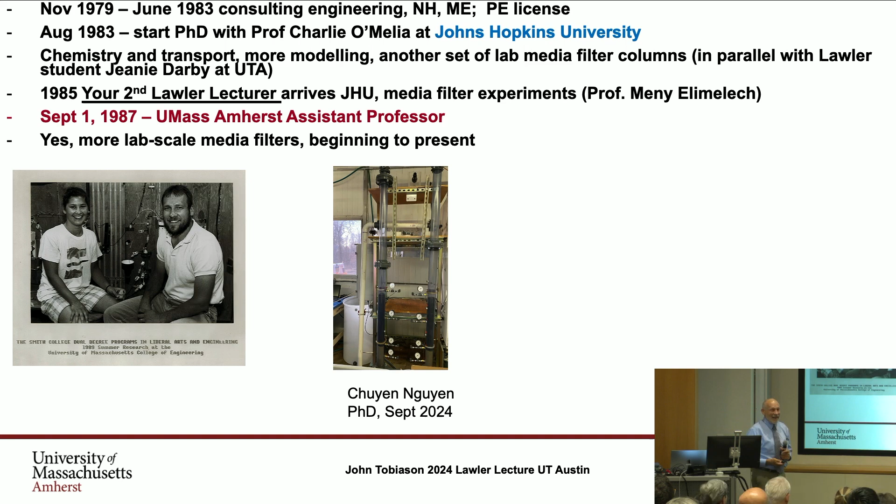I'm here to talk about these subjects. So why? Well, good fortune. I went to UMass Amherst, and Jim Edzwald and Dave Reckhow, who actually know something about DBPs, were there, and I learned a lot from them. And of course, I had a basis in it from going to UNC with Phil Singer and stuff. Then during my first year, Bill Knocke from Virginia Tech was on sabbatical, and we started doing manganese and haven't stopped together. So those things happened.

Really, the subjects are pervasive, complicated water quality challenges for utilities. That's really the reason they're here - fun, complicated, but super relevant to day-to-day operation of every drinking water treatment plant that meets regulations in this country every day. So we have to pay attention to them.

So the question - this comes out of Dave and I having a chance to present a lecture and talk about our lot of work with utilities and agencies. So why do that work? Why work not for NSF or NIH or something like that?

I think there's questions to be answered by PWSs, public water systems, that pertain usually to the regulations, but sometimes not. They don't have the staff time or the ability or the facilities to undertake the work, and they value their role in workforce development of students. That's critical to the teaming. The university values that student experiential learning - now we call it experiential learning experiences - and the scholarly output.

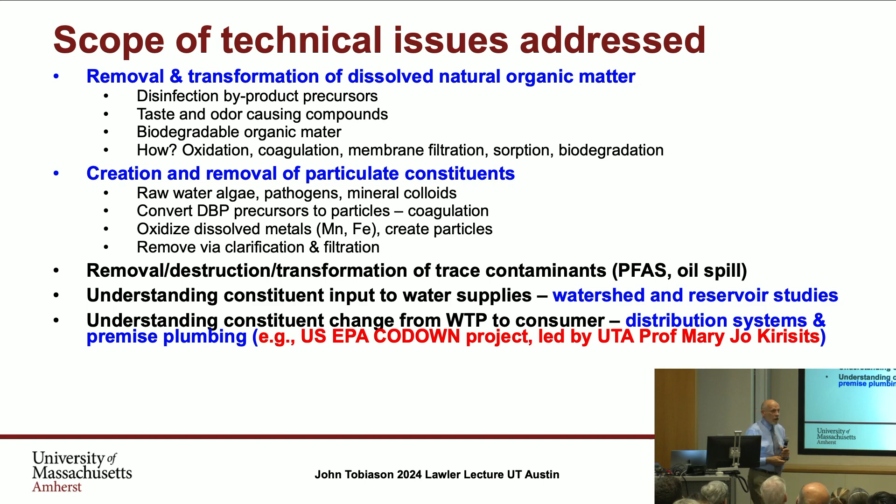Most recently and currently, Dr. Kirisits runs a project, EPA funded, that we work on related to disinfection byproducts and pathogens in drinking water systems. The UMass folks are focusing on DBPs. A couple of weeks ago, I was at one of our utilities and shipped some samples here to the lab for analysis by this project, for example.

How does this work? Well, you've got to have people in the utility or at an agency who understand the need to learn from the research, who ask good questions, and who value workforce education. You've got to have faculty who appreciate that interaction and see where this stakeholder-based work benefits their career interests, if it's good in their students' best interests. You need some patience and time to interact. You need flexibility—sometimes the utility needs something that wasn't your fundamental thing done, and you need to be responsive to that. And you need collaboration between everybody.

So all the things that are the hallmark of good community-based work in general—I think you have all these things here at your EWRE program at Texas, it's amazing, it's been great. By the way, our program is also called EWRE in our department, by that name, we've had all that together.

All right, so that's some background, interesting. I've got to get technical for the rest of this.

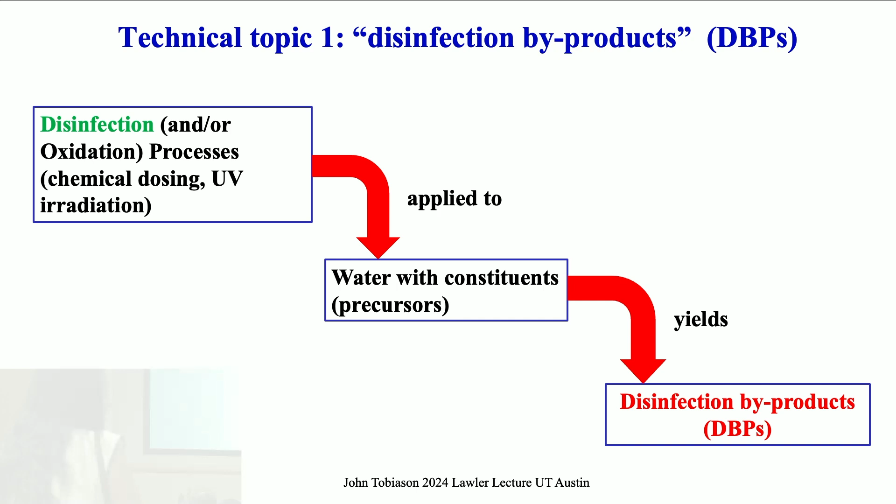So the first one is about disinfection byproducts, and although it's an extremely technical audience, which is great based on raising hands—unless you happen to be the HR person from the local firm, but probably not, you're here. So, we do disinfection. What I mean by that is applying things to water. The water's got constituents in it in addition to water, and it yields some things that we call disinfection byproducts—the byproducts of the disinfection process.

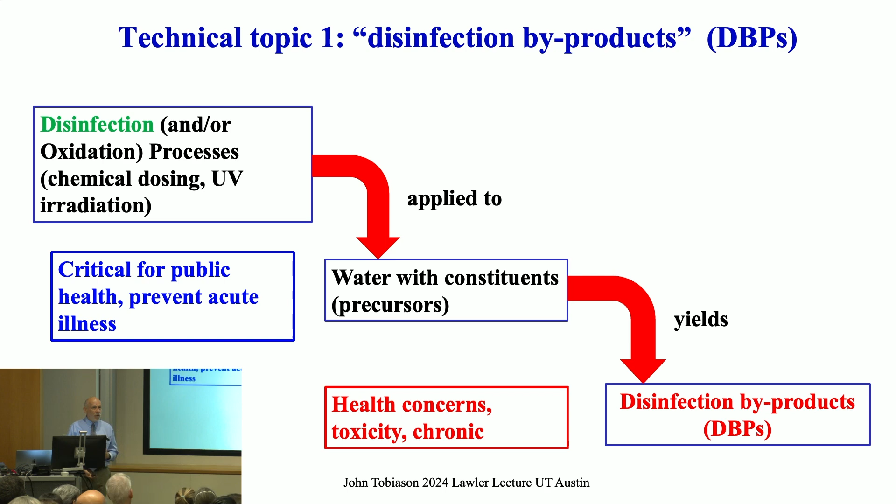It's really important—the disinfection part is a critical step in our barrier to protect public health. It's a treatment technique we use to protect people from maybe the occurrence of pathogens, maybe not, but we have it in place. On the other hand, the disinfection byproducts, unfortunately, have health concerns that are more at the toxicity and chronic level as opposed to acute. So we have this challenge of something we have to do, but something that creates problems we're worried about.

Just some definitions, and I apologize—some of these slides are very much teaching slides, so they're a little deeper than they need to be. Primary disinfection: we apply a certain level of disinfection that's regulated, that every utility in the United States has to report meeting every day. It's a necessity of providing water. We might do it at the beginning, middle, or end of treatment processes, and the disinfectants we're allowed to use by regulation to meet this goal are: free chlorine, chlorine dioxide, ozone, UV light. Chloramines are allowed, but very rarely do we have the time required to provide primary disinfection by chloramines—the occasional 10-mile pipeline between A and B, yeah, but in most cases we can't do that.

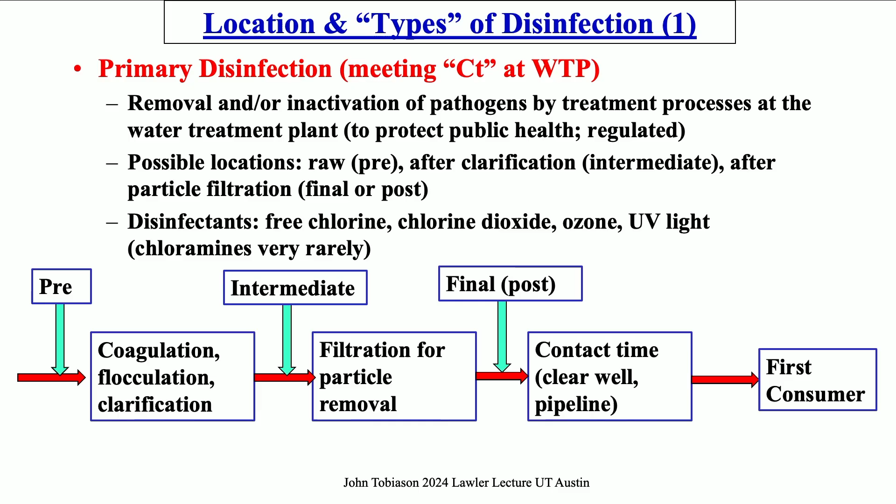Okay, secondary disinfection is the provision of a residual in the distribution system to continue to protect water quality—maybe provide some biostability, protect against recontamination, and serve as an indicator of water quality. Some aspects of this are tied to this CODOWN project, whether this is here or not.

Not everybody in the world believes in this or requires this practice, but in the United States, we do. This usually, though, is only for free or combined chlorine, or chloramines, not an occasional short-term chlorine dioxide.

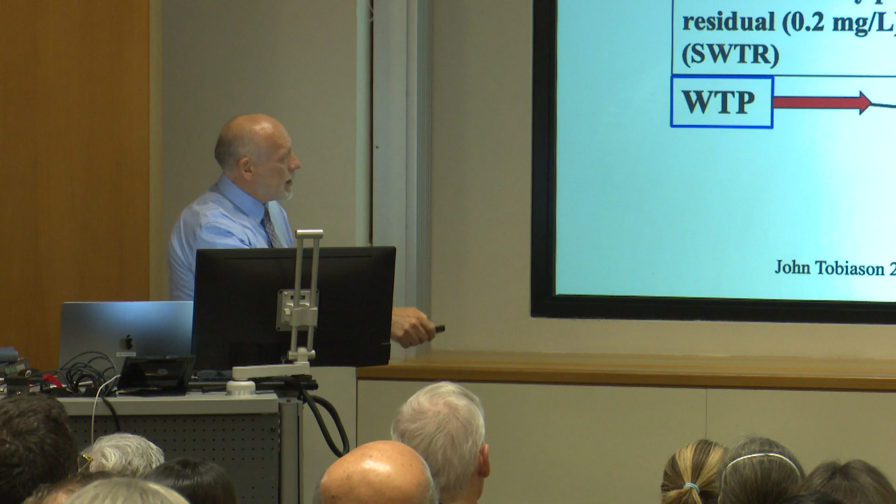So we have this paradigm here where we start with a requirement. This may change because I know Mary Jo's involved with the committee and the government. We are revisiting our disinfection rules and surface water treatment rule, and we may change that to not just detecting or sniffing it, but actually measuring a number there. For example, that's one of the things that might happen.

And we've got homes and buildings and storage tanks involved. So what's regulated? There's a bunch of organics regulated, the trihalomethanes and the haloacetic acids. The bold part there, we have a number.

The LRAA is a locational running annual average. We have to take samples from a distribution system, take the average over the course of a year, and be below this value.

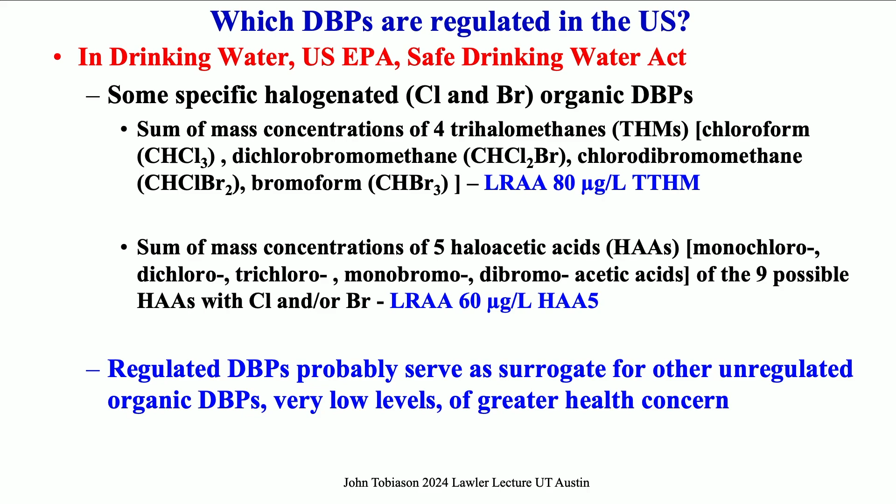I want to point out that if you actually look at the compounds being regulated and their associated toxicity and health risks, and our knowledge of some increased types of health problems, maybe bladder cancer related to drinking chlorinated water, these are not the compounds causing that. These are not the things.

So they're really a surrogate. They're really abundant compounds that we can measure and offer control of. And the notion is that if we control these compounds well, we'll also control other things that we don't know as of yet are the cause of those concerns.

So it's important to point out, particularly brominated compounds. We mentioned brominated compounds today, Pavel and I think. So some inorganics are bromate and chlorite. You'll see where that comes in a minute.

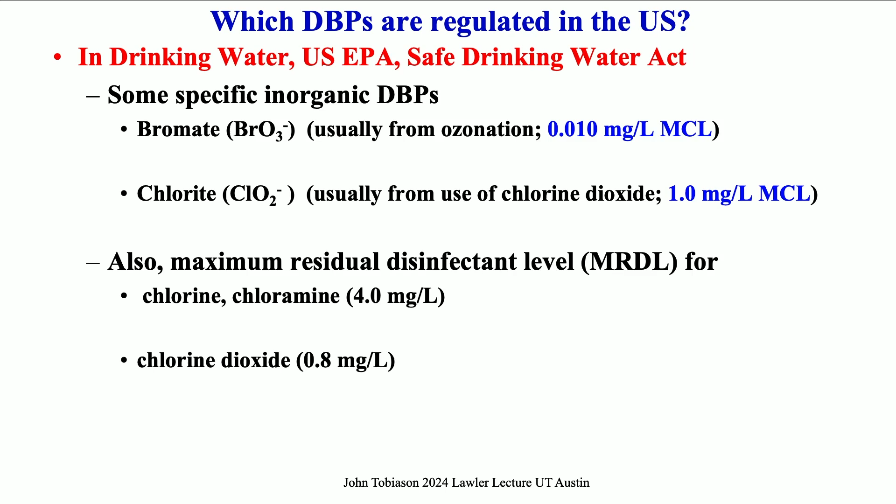Also, we don't like to call the things we do to protect public health contaminants, so we came up with another word called maximum residual disinfectant level, otherwise known as a maximum contaminant level for the things we apply to help us out, right? So it's a two-edged sword. Good, bad. We got both things going on.

All right, so how do we control DBPs? Really, these are the three main messages, and then I got a lot of flavors of how we do it. We can control our choice of the processes we use to achieve the objective and perhaps minimize the occurrence. We'll talk about that.

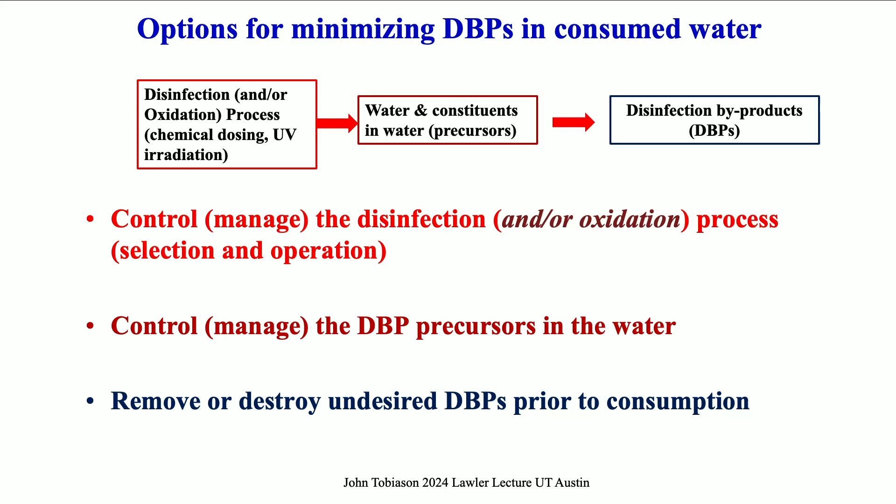We can control or manage the precursors, the things that the disinfectants react with in the water. And lastly, remove or destroy the undesired DBPs. The least good way to do this would be better to not make them in the first place. So, some color coding here.

Green, if you're not colorblind, this is going to be good. Green is good. Brown means that this aspect also ties to manganese. So the brown is that thing I'm saying there ties to manganese. The green is that it's good.

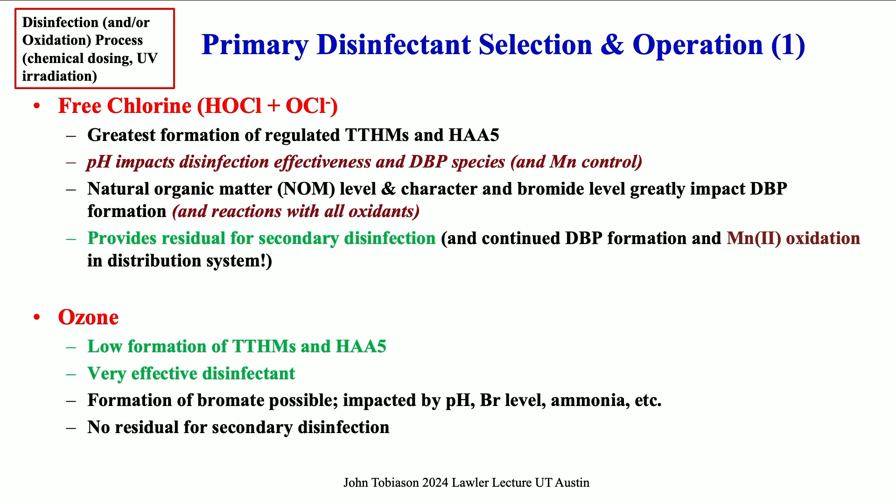So free chlorine is great. It makes, unfortunately, regulated trihalomethanes and haloacetic acids. The pH is a big player in disinfection. It also is a player in the control of manganese.

Natural organic matter, the nature of it, the amount of it, is a big player, and it reacts with all the oxidants. Oxidants are also reacting with manganese, so it's another thing that interacts. And it provides a residual for secondary disinfection. Green is good that we have that residual because we have to have one.

Unfortunately, while it's providing that residual, there's continued opportunity to make DBPs as that residual exists and we go along in the distribution system, and by the way, to oxidize manganese when we don't want it to be oxidized. So these things go hand in hand.

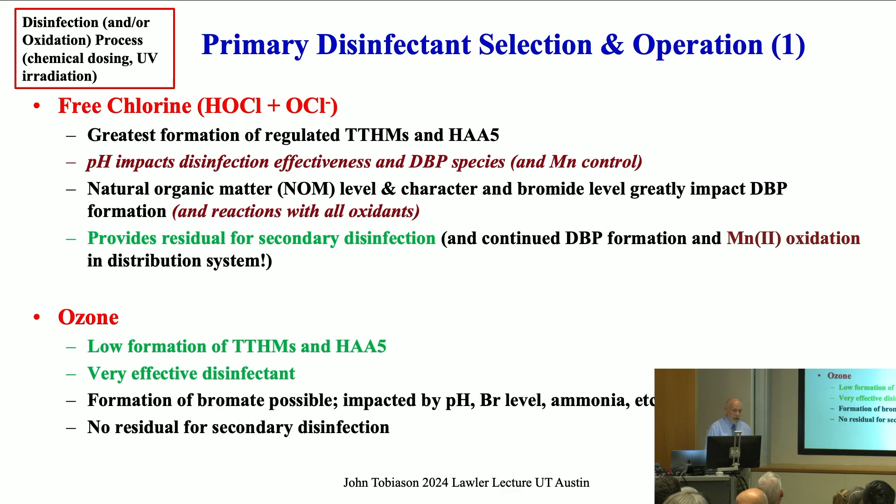Ozone, you may have heard more about this from your first Lawler lecture, Dave. This is one of his favorite topics, ozone, but it doesn't make much THMs or HAAs. It's a very effective disinfectant. But it does make bromate, and there's no residual for secondary disinfection.

So what about the secondary disinfectants? You're going to use free chlorine, you're going to keep making DBPs. So I mentioned that slow oxidation - it's good to limit the time to decrease formation.

Chloramines - Jerry's favorite subject, one of his anyway - is also good, and we do it a lot to meet regulations in this country. A lot, like 40%, 35%, some number of treated drinking water in the country. It doesn't make THMs and HAAs, but it might form some unregulated compounds of concern. It could be nitrified and be destroyed in the distribution system. But maybe it's better to control biofilms, which may impact opportunistic pathogens, than free chlorine. So a bunch of things going on there.

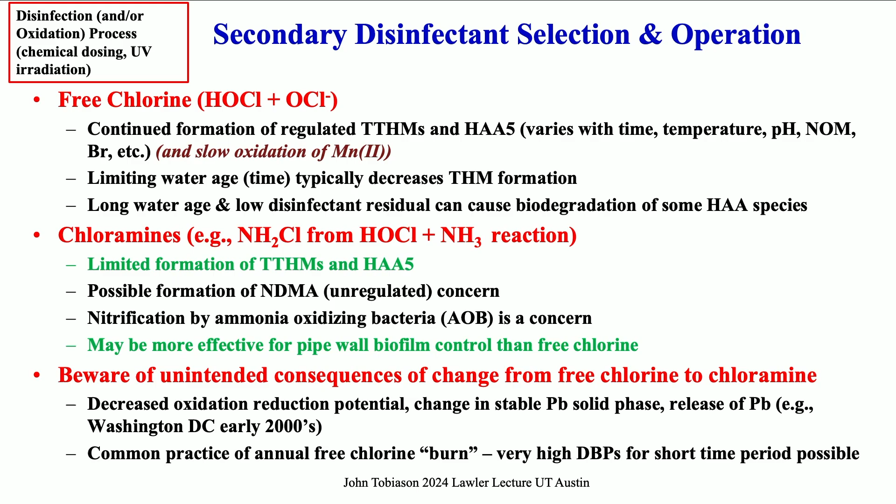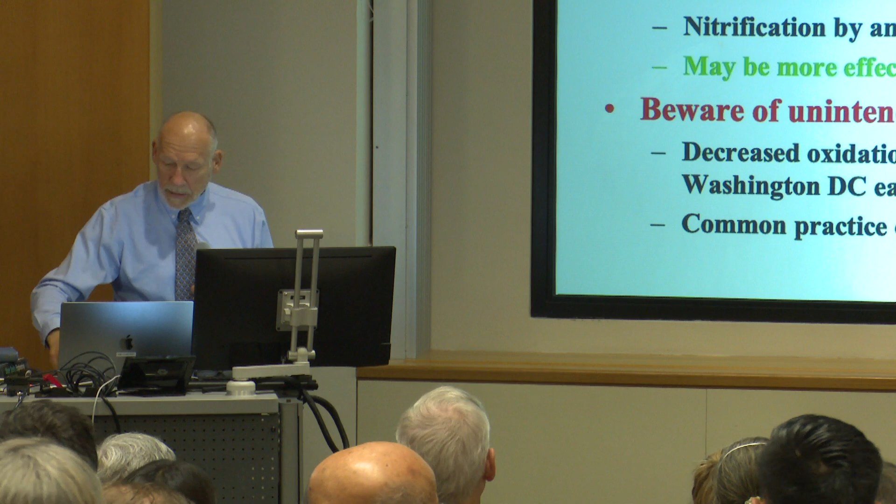A little caveat here in the drinking water world - I think most folks are aware of this - you've got to beware when making a conversion from free chlorine to chloramines, because you might have unintended consequences with lead, like in Washington, D.C., for example. Also a lot of places end up with what's called a free chlorine burn, which is great operationally, but no one talks about the water quality produced during that burn because nobody wants to know. Nobody samples for regulations during that burn. It is not a place you want to be. So it's not a great thing - unintended consequences.

All right, so a little bit on the science. This is a Dave Reckhow slide that I love. So the precursors: free chlorine, NOM, and bromide. I'm not going to say much about this, but it just turns out that bromide reacts super fast with free chlorine, makes hypobromous acid, and hypobromous acid reacts really fast with NOM compared to free chlorine. So you don't really like that to happen.

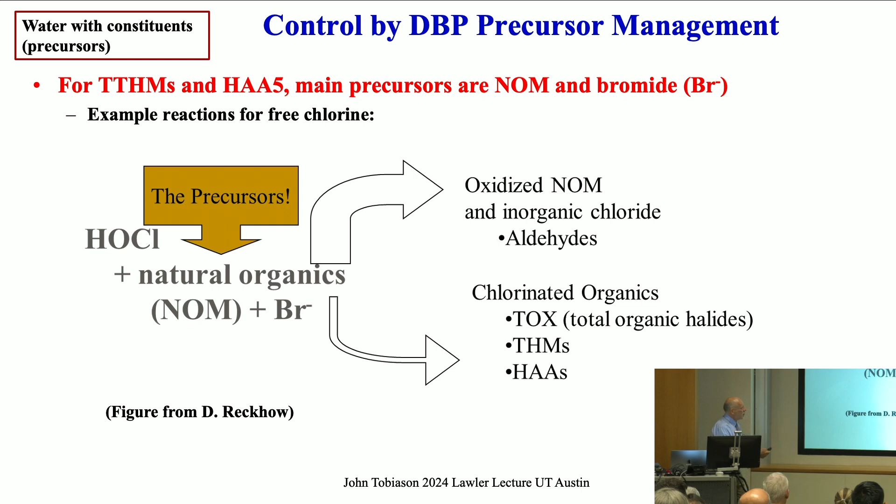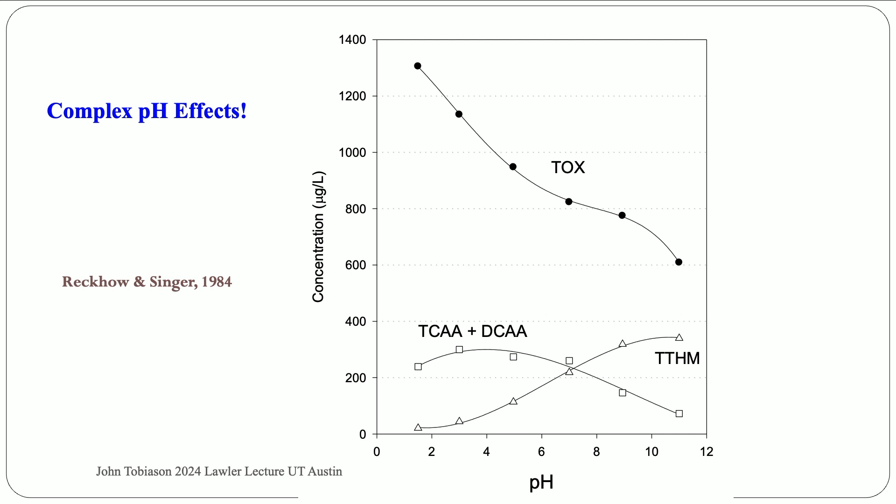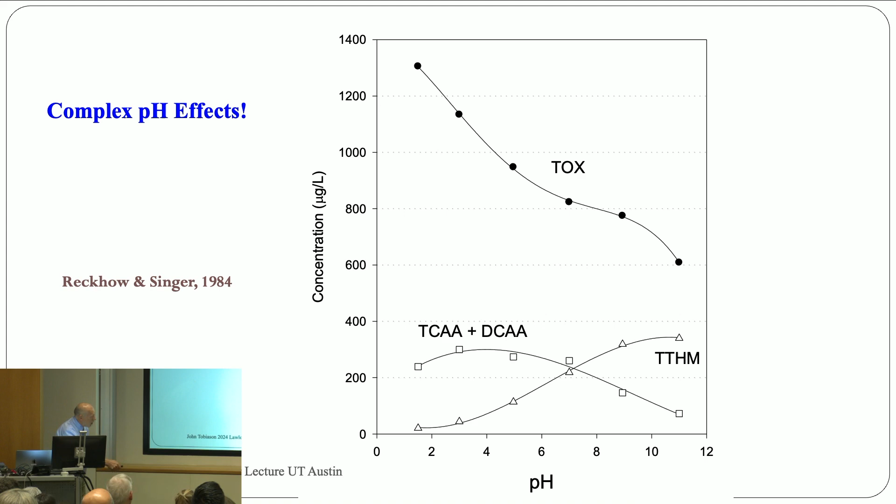This is a slide from Dave's PhD with Phil that I just want to point out. pH - here's pH, two regulated things, HAAs and THMs. Should the pH go up or down? Depends, right? That makes more THMs and less haloacetic acids. So it's not a simple answer - it's complicated, mixed with those two things that happen in here. We get multiple effects. Notice in the lab you study things down to pH 2 and up to pH 12, but notice in drinking water treatment we only deliver things between here and here - that's all, we stick in there. But in the lab you need to understand those things.

Okay, so the management of precursors - the biggest thing we learned at first was don't chlorinate raw water, don't add chlorine at the maximum precursor level. So that changed a lot. Maximize the removal - most commonly it's for NOM, not bromide. But the problem is if you do that, you increase the ratio of bromide to NOM when it does occur.

And you can make more brominated DBPs, which are probably the more toxic DBPs. By the way, it's a mass-based health standard, and bromide is a lot heavier than chloride. So it turns out for the same number of moles of stuff, you get a lot more mass of stuff, and you violate the regulation just because they were brominated, not chlorinated.

So a couple of classic cases happened. The other thing I'd probably spend more time on in studies with utilities is practicing optimal coagulation to maximize NOM removal. But sometimes the optimal pH for coagulation can be at odds with good manganese oxidation. So that's a problem we have to face.

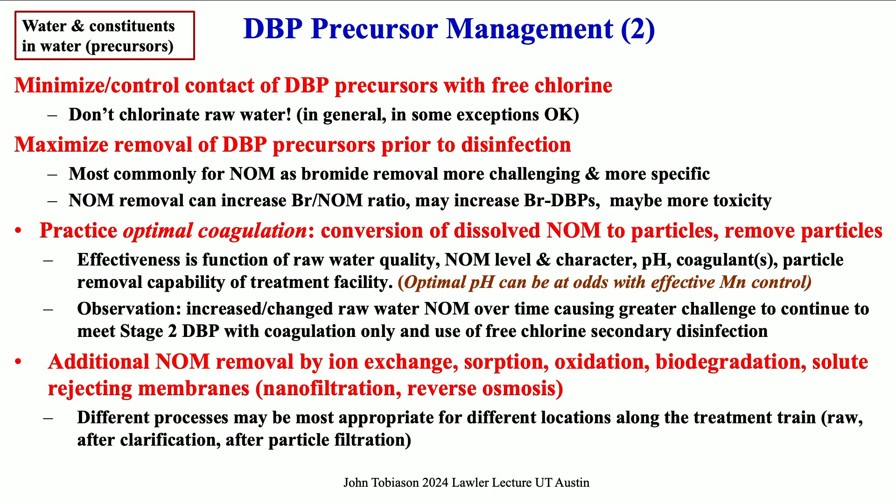And then we study all kinds of ways to do additional NOM removal, and I'll only mention a couple of those things. We have this fortunate situation where things we measure in the water about organic carbon also correlate with trihalomethane formation potential when we chlorinate it.

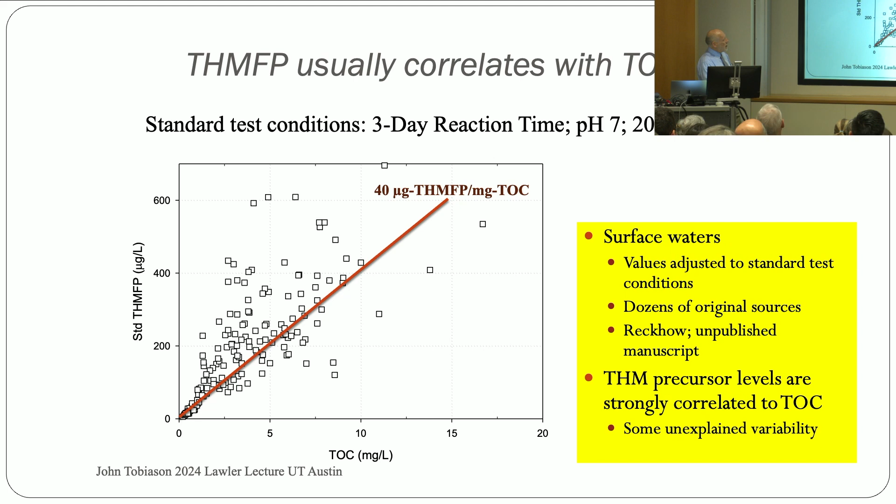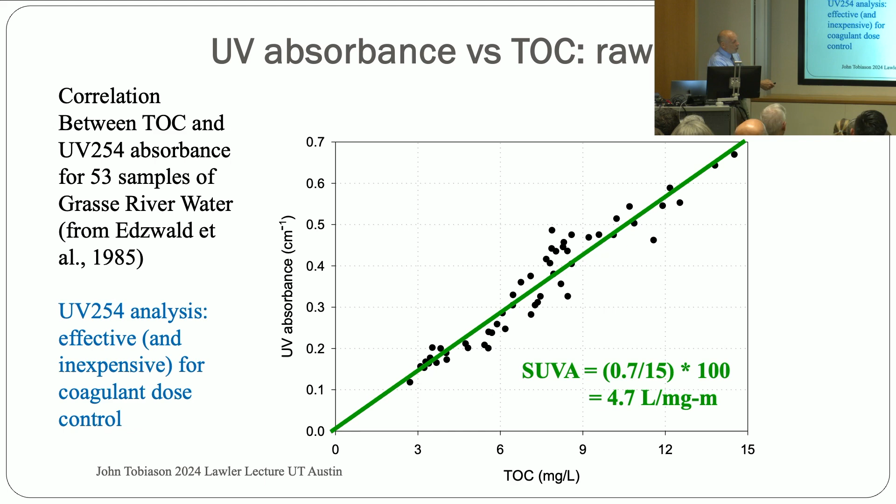This is one particular set of data for TOC. And it turns out something that's really easy to measure in the lab, UV absorbance, super cheap, super fast, also correlates with TOC, and it's great for controlling coagulant dose. So the slope of this is specific UV absorbance. I don't have time to talk about that, but it's the character of the organic matter.

UV and THMs correlate, so we can use a simple measure of UV and get a good idea of how treatment performance works. We'll do that a lot. Classic jar test: UV as a function of dosing of some coagulant, optimized to get a very low level of UV. This is the classic way to control NOM and get good performance.

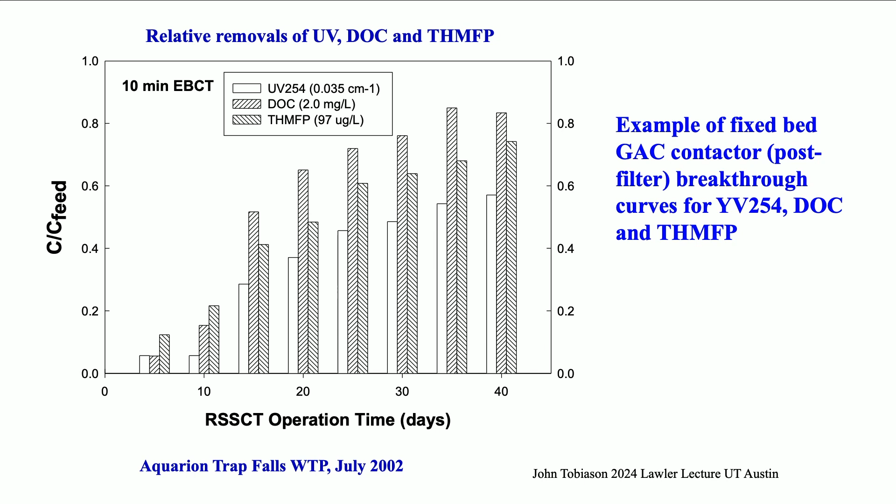This is a breakthrough curve for a carbon contactor. Imagine you're going to use a carbon contactor, GAC, to remove organic matter. This is DOC, UV, and THMs, and you see it correlate.

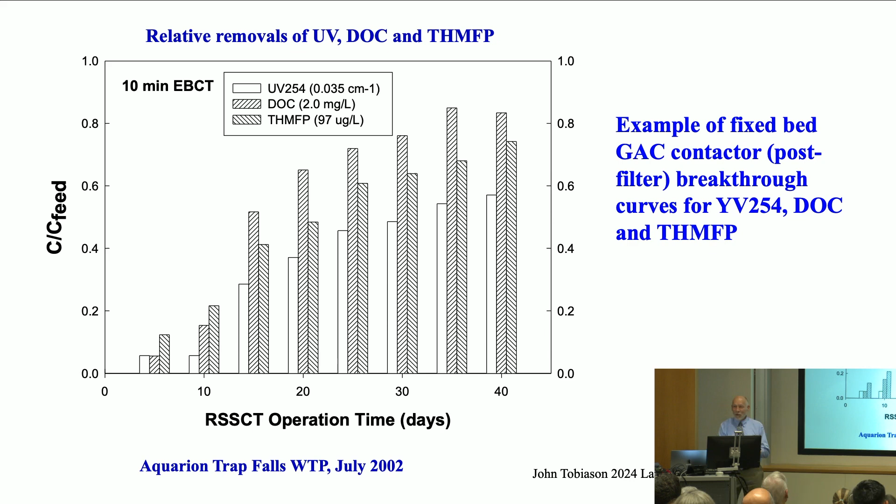So Dan may have done the membrane studies that were parallel to this, but I don't remember. Or both. I know he made the membrane system work. I remember - oh man, I'm sorry. Well, I know he made it work.

Okay, so the other couple of choices are: let's destroy the DBP precursors, just make them not make DBPs. So we can add oxidants to do that. And the cool thing about doing that is we also do that for manganese control strategy, so maybe we can get both out of that.

We might find an additional decrease, but sometimes we can get it all by coagulation anyway - sometimes. And then, something some of you in here have worked on as well, we might be able to remove more DOC if we allow part of the process to be biologically active and biodegrade the DOC. So it's another removal mechanism to get rid of precursors.

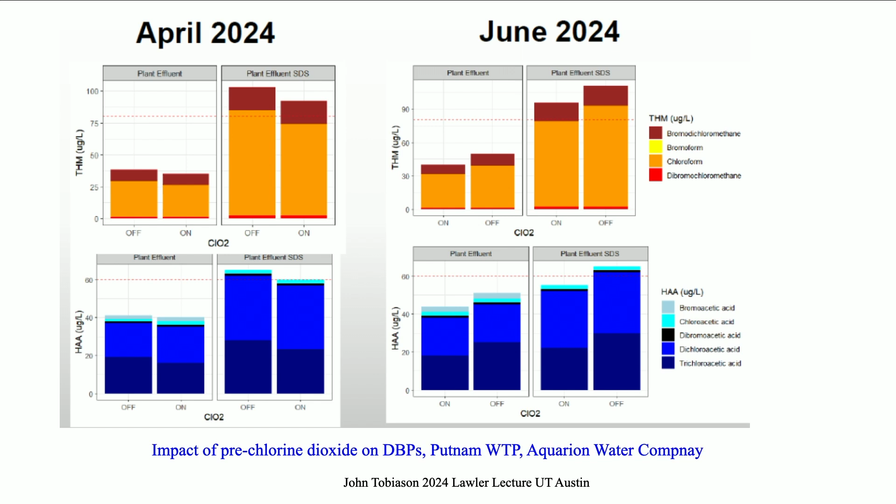Just because it's recent, from that same PhD student I mentioned who was doing filtration - this was full-scale work. This is chlorine dioxide on and off at a plant called the Putnam Water Treatment Plant. It was off, and then every summer they turn it on. A little bit later we turned it off for a couple of days just to see the impact. So we went off to on, and on to off.

And in all these DBPs, basically a 5 to 15% decrease in DBPs resulted with the pre-chlorine dioxide on. So a win for that. She wasn't studying that - she was studying its impact on filter performance, which I'm not talking about today. But anyway, that's another topic.

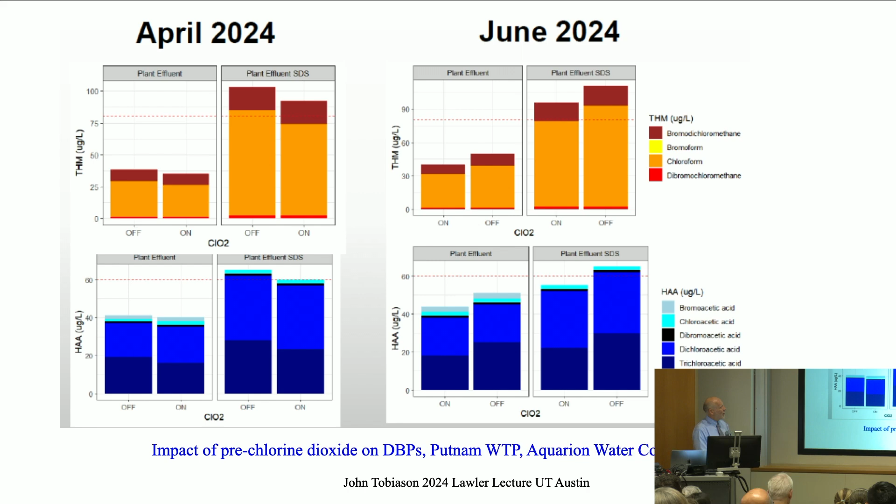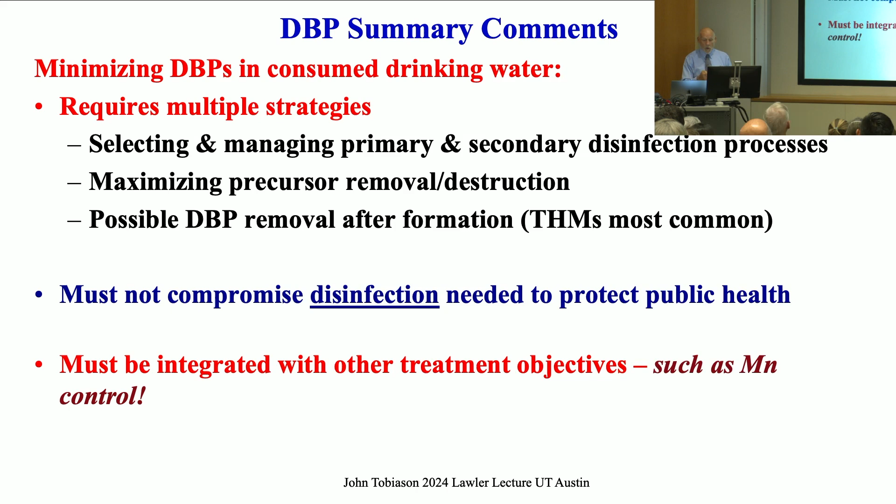So the second technical topic is manganese. I have some preaching points at the beginning: one is, in the water profession, you talk to somebody and they say 'yeah, we do iron and manganese control, we treat for iron and manganese.' It turns out there are two things - one is iron, one is manganese. They're very different. Sometimes they occur together, sometimes they don't, but it's not one word, so you've got to pay attention to it. It's a very common need.

Complexities are often ignored, myths perpetuated, and mistakes made. I'll talk about lack of characterization of forms, and with our super accelerating attention to PFAS, it turns out a lot of groundwaters contaminated with PFAS also turn out to have a lot of iron and manganese. If you don't pay attention to that, you can plan the greatest PFAS removal system in the world and have it not work because of iron and manganese. So it's this pervasive problem you have to pay attention to.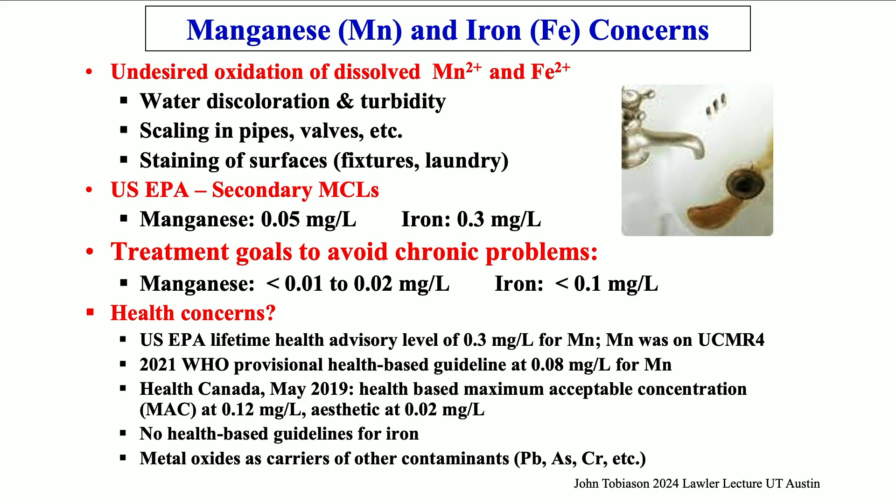I also mentioned this, Lynn would appreciate knowing this. When you make iron or manganese particles, they tend to like to have other things associated with them. So they might just be a carrier of some other toxic trace level component that you didn't plan on. That's another reason to pay attention.

So where does it come from? In groundwater, it's often fairly stable over time. This is a picture of a well near our house in South Amherst, Massachusetts. There's iron or manganese or both. Usually they're the result of really reducing conditions, often associated with microbes who just want to dump electrons on the enormous abundance of iron and manganese oxides in the Earth's crust. And if it's a place to go, we get reduced iron and manganese. It's relatively stable, and we have some co-contaminants.

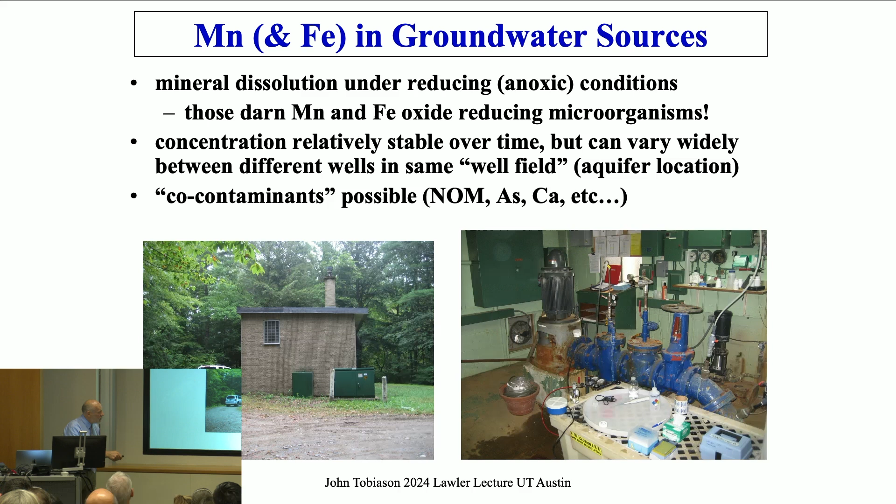This picture's here - it's not an iron talk, but in my opinion it is impossible to bring a sample of groundwater with reduced iron to the lab and not have it change. I've worked very hard to keep oxygen out of that sample, but it fails - nitrogen baths, all kinds of things. So this is doing the work right at the place the water comes out of the pipe, because it turns out the water stays in the pipe and goes to the consumer - it doesn't get a chance to go to the lab and change. So you have to figure it out there.

All right, surface waters - it's usually seasonal, usually from anoxic conditions that allow microbes to reduce manganese. We get significant seasonal variations. Usually in river sources, manganese is in particles. In treatment plants, sadly, when we remove it we can also recycle it, because we put it in sludges and it comes back around in recycles.

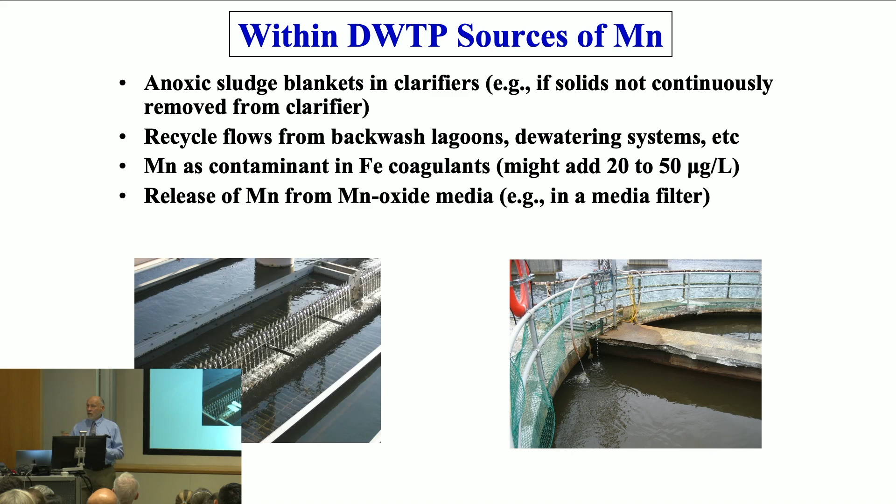That's a problem. And darned if one of the coagulants we often use in the business - it used to be worse, it's not as bad now - iron chloride is contaminated with manganese in the production process. So if you're the Metropolitan Water District of Southern California, you didn't know you were dosing manganese to your water for 30 years and coating your filter media with manganese oxide, until you decided to change a process that made that a huge problem, and it cost millions of dollars to replace filter media.

So we can have release, and we can have other things going on. All right, so there are three control approaches.

Minimizing the source water: we can do some things with groundwater, blend sources, surface water, reservoir aeration, using multiple intake depths. Treatment, we're going to talk about that.

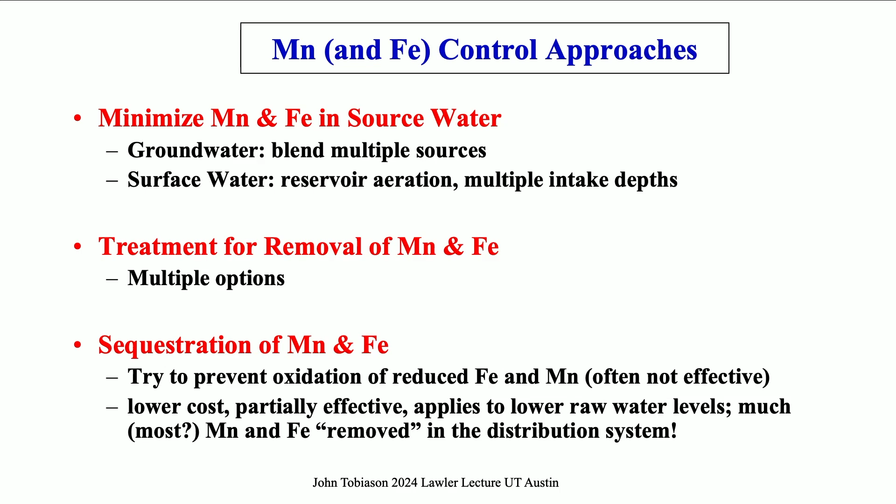And the last one I mentioned, because it really should have a big red X through it, and let's not do this anymore, because we've been pretending too long this is useful. So sequestering—it's the notion that we can add something to the water to interact with these reduced manganese and iron

and prevent it from being oxidized where we don't want it to be oxidized. We had one student study this extensively. Iron, never, not a chance. In the presence of free chlorine, by the way, that's out in the distribution system. Iron, not a chance. You stabilize colloids of iron, but never reduced iron.

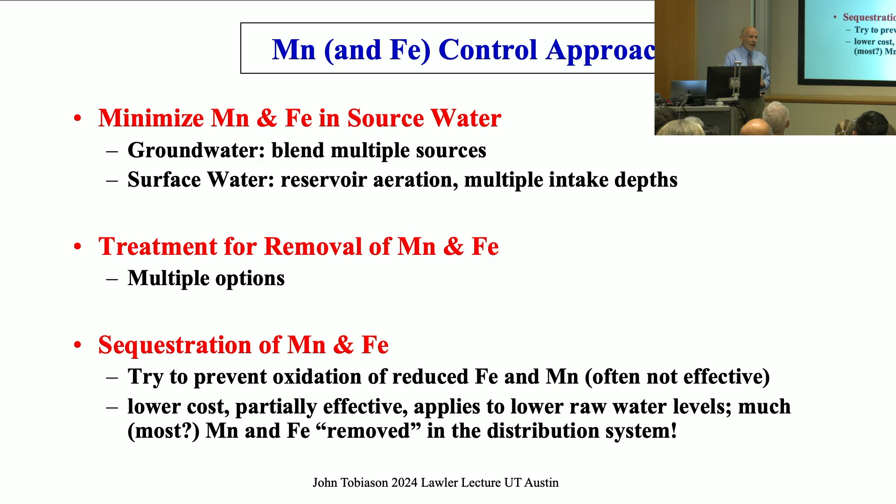Manganese, semi-effective. All you have to do is go out to a system that does this and open a fire hydrant, and you'll see where the iron and manganese are. The distribution system is a very effective removal system, and unfortunately, it's all—I have a great slide, it's just black pouring out of a fire hydrant.

We went out and made measurements leaving the plant at the people's homes. There's only 20% left. Where was it? It's in the pipe. So it's a problem with all kinds of other co-constituents. So it's in there, all right?

So I'm not going to do questions while I'm rolling along, all right? So there's a lot of forms. For manganese, I'm going to focus on that's the reduced form. Permanganate is something we make.

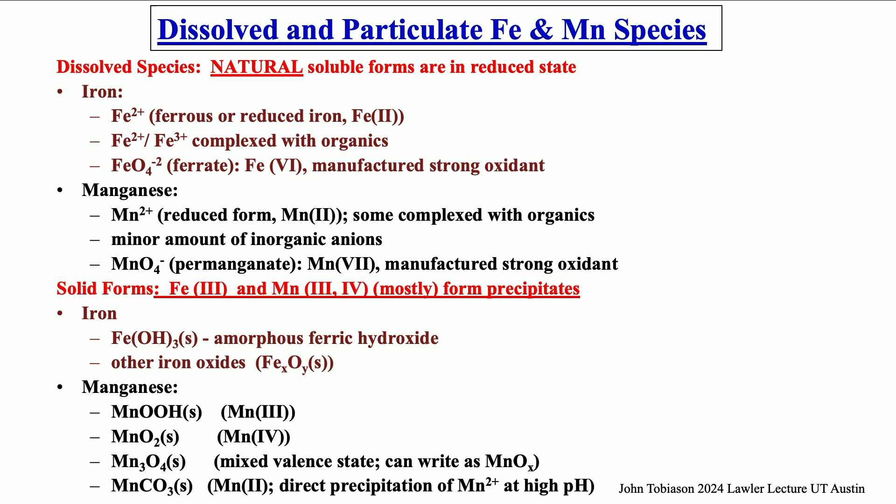So here's a weird one: we use manganese to treat manganese. Not the best choice, but anyway, we do it. Manganese makes a lot of solid forms, various oxides. So a lot of times we write MnOx because the X might be 2, it might be 1, it might be 1.5. So we just work that out.

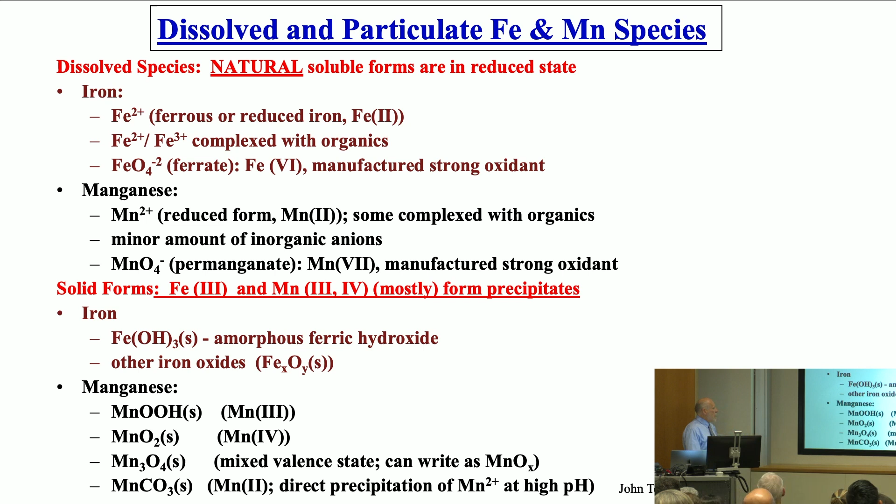And so occasionally we make manganese carbonate here in Texas where you have some hard waters and you might precipitate manganese carbonate. I believe Des has looked at this. And at very high pH, you might be able to oxidize manganese as well.

All right, so there's another little thing working in this. It turns out that you really need to know whether the manganese or the iron is or isn't oxidized before you apply a treatment technique. And the challenge is that sometimes it's oxidized to very small, stable particles that if you don't do the right separation technique, you think they're dissolved, and you apply an oxidant to oxidize already oxidized things—it doesn't go well.

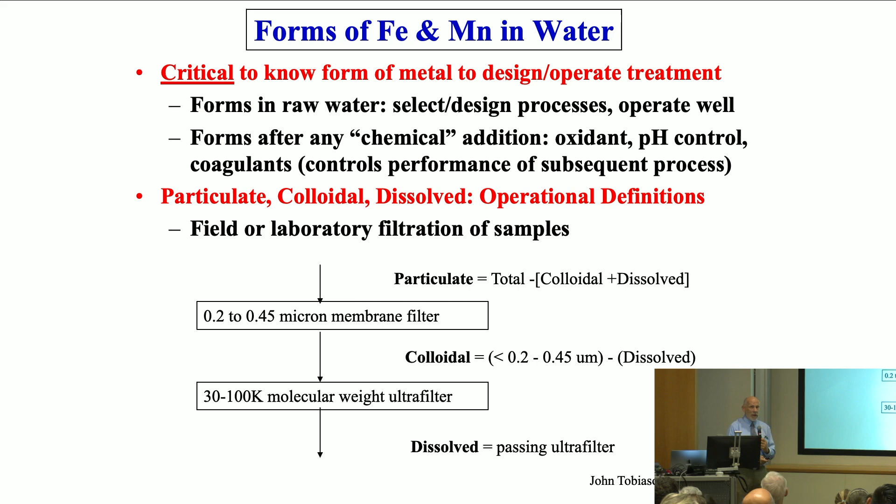Right? Bad things happen. So we do a separation to make particles—colloids between about a couple nanometers and a few nanometers and 0.2 microns—and then we call this dissolved. But you can pick any one of the numbers you want in here, and there's a continuum, a spectrum of stuff. So we do this; remember, there's nothing dissolved that isn't operationally defined as dissolved, that we measure. They exist that way. So any of you students in the lab, some syringe filtering, an ultrafilter.

And it's important to know that difference between colloidal and particle. So what do you do? There's one easy solution: you take a sample and you aggregate it, coagulate it, and you do that before and after a simple separation step, and the difference is the colloidal, because you make them big enough to be removed. But that's not easy to do either, so it's important to do this.

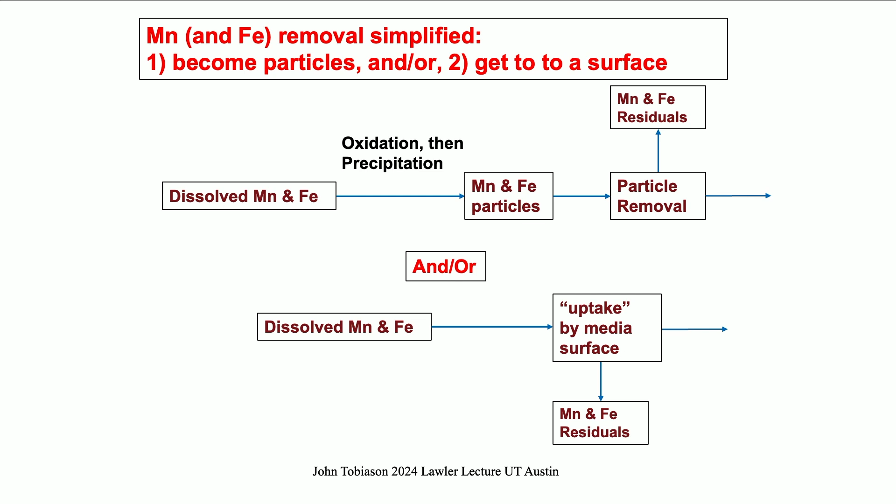All right, removing manganese: the super simple thing is become a particle or get to a surface. Those are the two things. The stuff becomes a particle, and we take it out through all our particle removal mechanisms, or we get to a surface, and things happen at surfaces of different sorts, many different surfaces, and we get it out. Those are the two simple things.

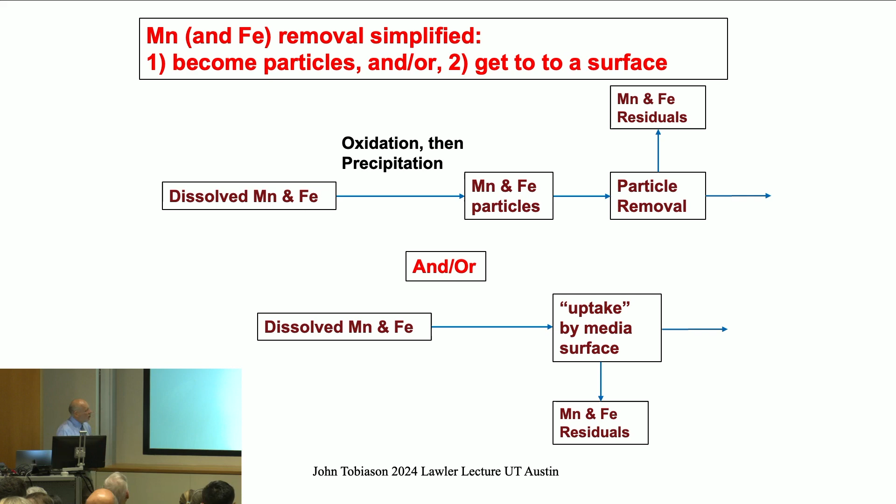We wrote a paper a few years back summarizing this. It starts here: if it's a particle or a colloid already, go this way, take out particles. If it's not, make it a particle and take it out, or get it to a surface. Some of those surfaces make particles, and they come out over here.

Some of them don't, and it goes out in a waste brine. So that's the basic thing. Become a particle directly or get to a surface, right? Or be a particle to start. But usually we're not here. That's a problem, it's over here.

So in terms of chemical oxidation and particle removal, we do it by adding oxidants, give some time, do some kind of filtration, and we take the particles out. If it's a surface water, usually it's part of other processes: coagulation, flocculation, some kind of clarification, and some kind of separation. So we do that.

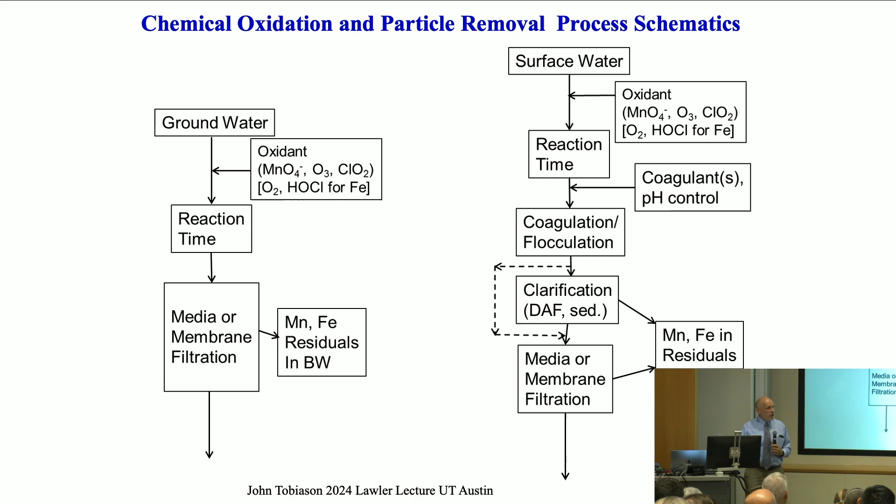In the teaching of a physicochemical process course, we talk about chemical reactor engineering. There's really two key steps. I call them how much and how fast. The fancy words are stoichiometry and kinetics. So stoichiometry, add the right amount of oxidants, also operating costs. If you're going to go to the engineering, this is operating costs.

Proper dosing in this approach is challenging, especially in a surface water that changes a lot. We did one study where the diurnal, during the day variation in dissolved manganese entering the plant was amazing. Trying to track that with permanganate dosing, good luck. It's really difficult to do.

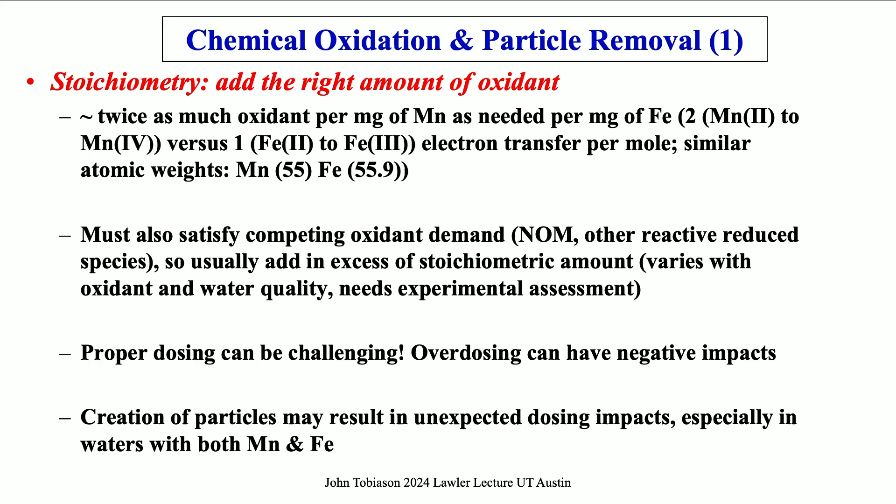And Lynn would appreciate this. I think the creation of particles may result in unexpected dosing. Particles are reactive surfaces, particularly small particles, really reactive surfaces, so surprising things can happen. In many cases, it's beneficial. Turns out we can add less than we thought we had to because of catalytic oxidation on the surface.

And then reaction kinetics, how fast it's going to happen - this is capital costs for the engineers, right? How big a tank you got to build? What's the mean hydraulic retention time? What's the hydraulic retention time distribution? So how much time do we need? It's a factor of a lot of things: water quality, competing demands.

A cool thing with iron and manganese I have to mention is that you can oxidize iron with free chlorine and not make any DBPs if you just add enough to oxidize the iron, because as you may get taught in chemical reaction classes, when you have multiple competing reactions in parallel, the fastest wins. In this case, the iron wins, and the free chlorine and the NOM don't make DBPs very fast. Iron wins, and we can use free chlorine, use it all up, and just do that. It's kind of cool. And we can do batch testing to get to that.

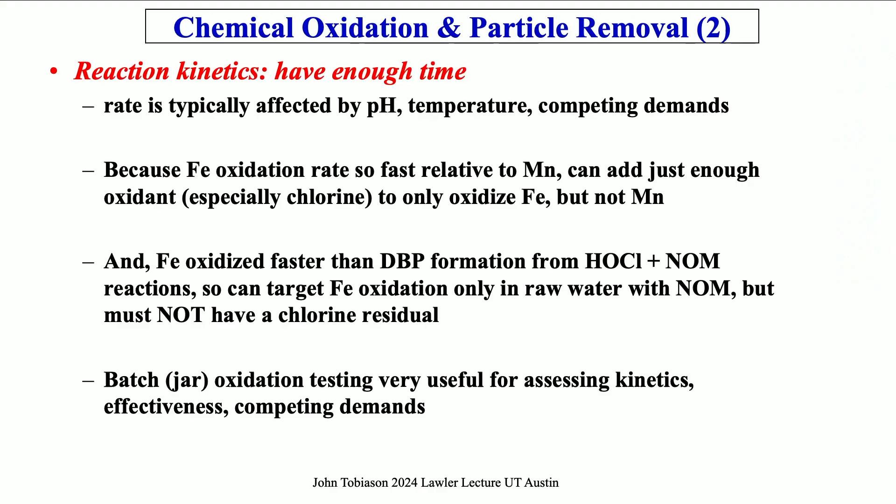Just want to say something about the particular strong oxidants here. We can make a lot of stable negatively charged particles with strong oxidants, and if you do that after coagulation, they are stable small particles that media filters don't do well with - because they're stable, not because they're small. And it turns out you can overdose. Turns out permanganate, if any of you have done it, is this brilliant pink, purple color. But most people don't like purple color in their water. So if you have permanganate, that's a problem.

So permanganate itself can do it. Ozone can oxidize all the way to permanganate. Ferrate can oxidize all the way to permanganate. So you've got to watch out. Also, they make DBPs - bromate and chlorite - so they have their problems. And it turns out with ozone, it's really hard to get very low levels of manganese.

And then if you add an iron or manganese chemical to deal with iron or manganese, you're just making more iron and manganese residuals to deal with. You're just creating more problems. So it's long been used, but it's not the best.

And then sometimes the oxidant can give you other benefits. Harking back to our first subject, you can get disinfection out of ozone and chlorine dioxide, and maybe do some taste and odor destruction or cyanotoxin destruction. So those are good things. Permanganate gets no disinfection chops, unfortunately. And a few other things we do probably give us disinfection, but they don't get credit for it.

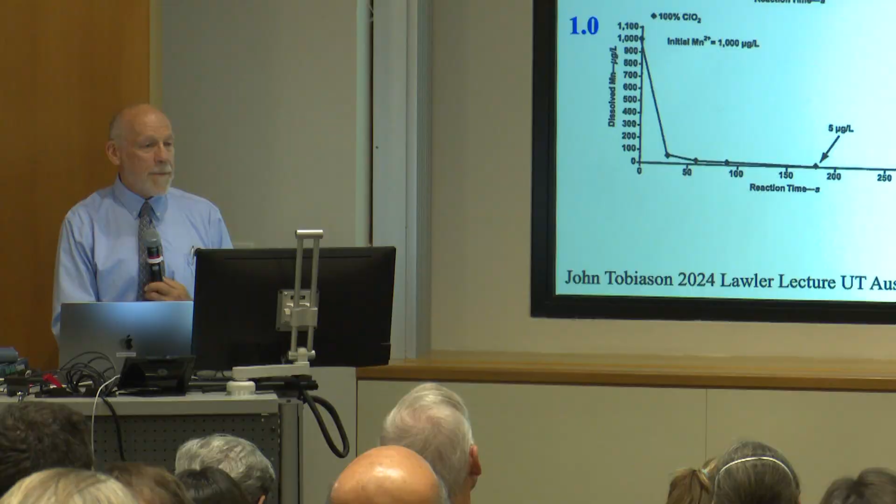Okay, so there's some graphs from work done at Colorado State.

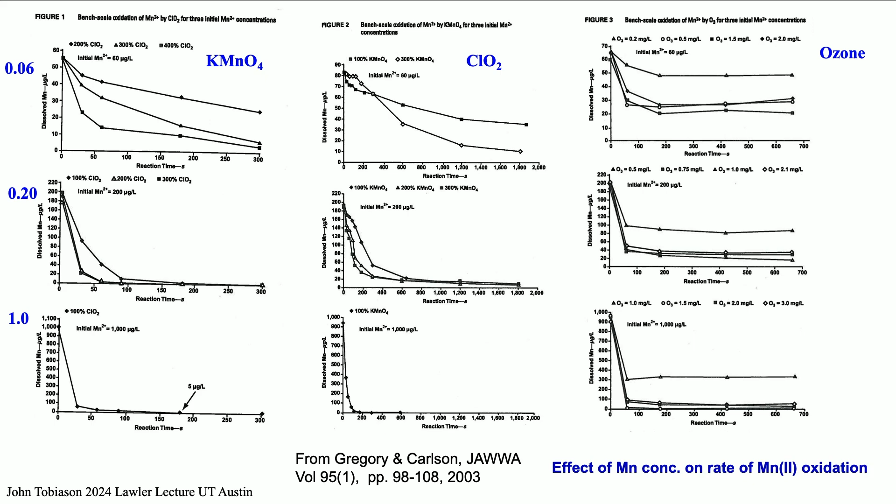Permanganate, chlorine dioxide, and ozone, starting at 60, 200, and 1,000 micrograms per liter, showing that chemical kinetics makes sense: it goes faster when you have more to start, so the rate is higher. This is 300, this is 5 minutes, this is quite a few minutes, and the main point is it never gets down to this 10 or so level. So ozone is hard to get low enough. This is faster than chlorine dioxide, and there's a lot of other variables as well.

A laundry on Cape Cod in Hyannis, right next to a fancy hotel, when it opened and moved in the system, had spent a lot of money on treatment facilities that failed because of colloidal iron staining the white laundry for this fancy hotel on July 4th week. It was because he'd bought media filter and ion exchange, neither of which touch colloidally stable iron. So he didn't get very good advice. But we figured it out.

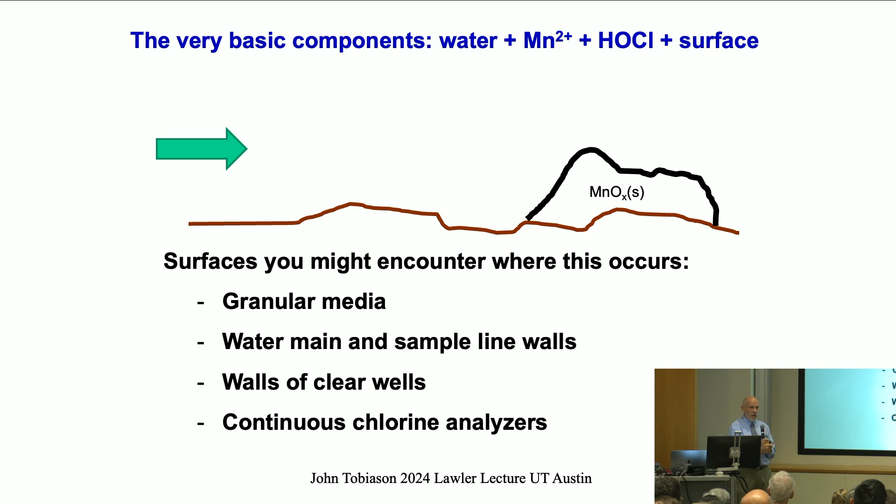Usually there are things you want, maybe granular media, but a lot of things you don't want, all these other things. The sample line at treatment plants that's continuously running to a lab sink, I've observed phenomenal removal there. But if I go to the place it's taking the sample from at the treatment plant and do my own grab sample, there's plenty of manganese there. It's just all in the sample line on the way to the lab. So you have to pay attention to that.

It's a 2-step process, sorption and surface catalysis, and the surface is regenerated. By the way, the subject of James Morgan's PhD with Werner Stumm was this. Continuous regeneration works great with free chlorine. Intermittent regeneration can be done, and I'll mention this. It's basically an adsorption breakthrough curve type of process, so it has its limits. The 3 classes are green sand, oxide-coated media particle filtration, and the one I want to say the most about is this one right here, the 2nd stage contactor. So I'm going to get to that.

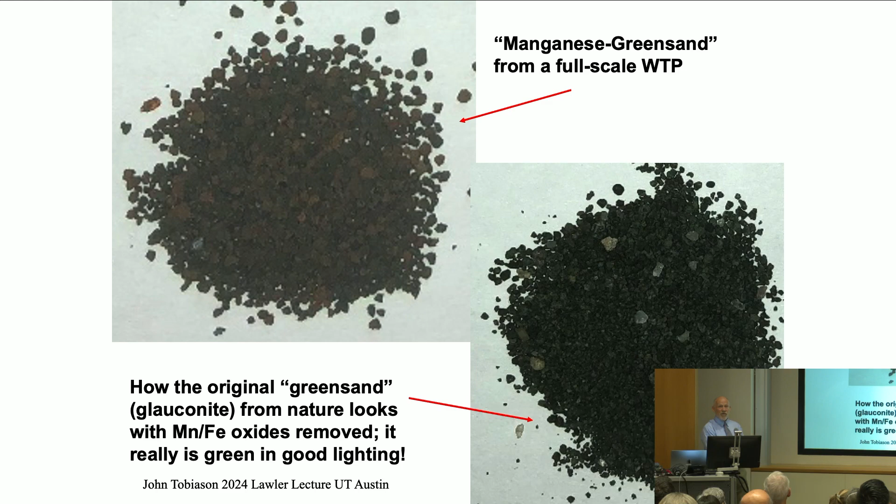This is a picture of manganese green sand. Green sand is a word used in our business to mean a lot of different things. I don't like it, but it turns out green sand was something we mined, glauconite, and it is green. But when we use it for manganese or iron removal, it's not green anymore. It was only because it was a natural ion exchanger that took up cations. Somebody put some chlorine on it, it turned black, and they found out it was better for removing manganese. So it's called manganese green sand, but we've dropped the manganese, so it just gets called green sand, even though it's not green sand anymore.

We make a manufactured version called green sand plus, that's one. It turns out plastic media, ceramic media, silica sand are coated with manganese, and some have the coating taken off, et cetera. This is pyrolusite, it's 100% manganese oxide, so you can't do that, it all goes away. Any surface will become manganese oxide coated.

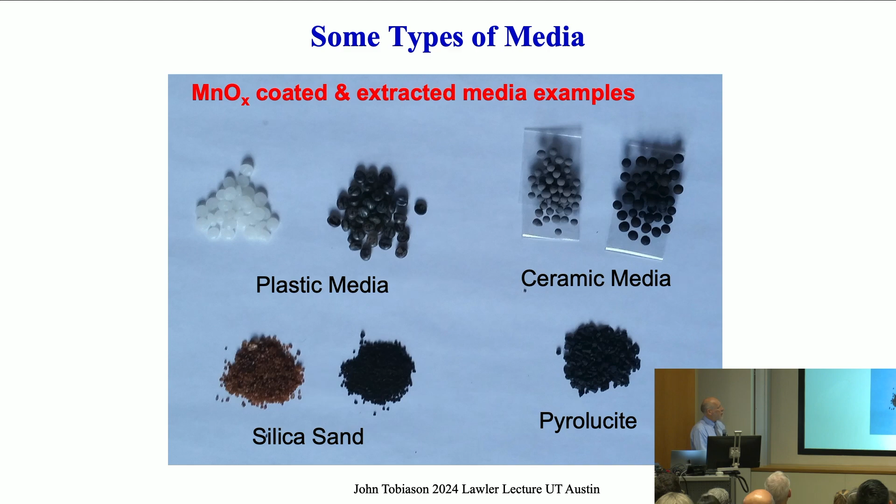Typical green sand is used in groundwater, with continuous application of an oxidant, and the media regeneration is either continuous or intermittent. A lot of utilities think they can do continuous regeneration with permanganate. They think the permanganate is getting to the top of this filter and regenerating the media. I would posit that rarely occurs because it's a dangerous place to be. If the permanganate doesn't react, you get pink water coming out, and if it does react, you make manganese oxide colloids - why would they deposit if they're negatively charged?

In my opinion, we just never measure it here. People think this is happening, but it's not. One of my goals in retirement is to go get some of these measurements done on my own time because I want to figure it out. So intermittent regeneration works that way.

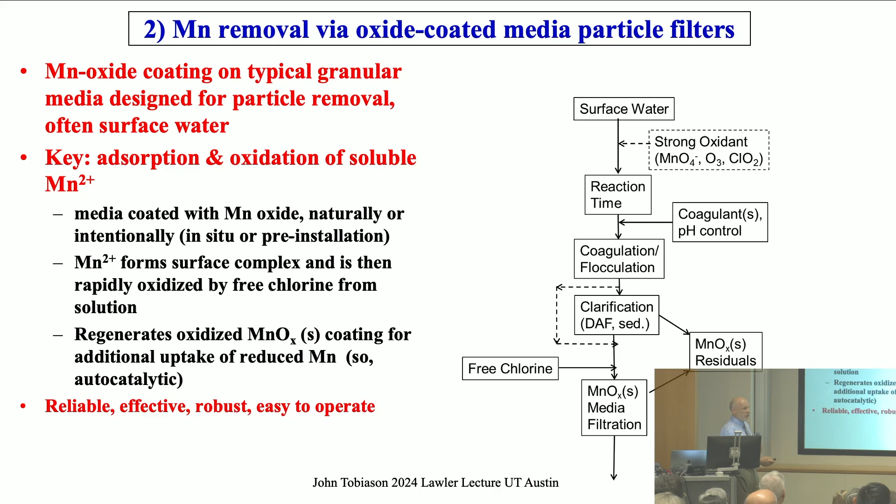A subject I spent a lot of time on is this: it turns out we build media filters to remove particles. If there's free chlorine and manganese around, they get coated with manganese oxide, and it works really well to do this. It's reliable, effective, robust, easy to operate. Go out to some plants - this is manganese coating on anthracite, 20 to 40 milligrams per gram.

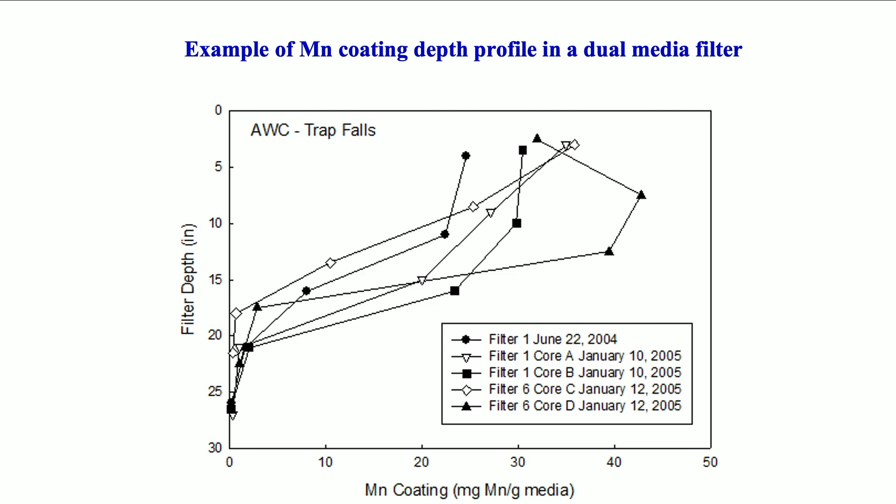By the way, I didn't show you a picture of anthracite - it's black before and after, not very visually appealing. And it doesn't even make it to the sand. This is a cross-section of anthracite. It's got quite a nice deposit of stuff on the surface, a lot of it's manganese. A lot of interesting things going on there - there's aluminum and iron in there, and I don't know why they're there.

So if this process is so good, this is wonderful - you just measure chlorine residual coming out, and it works like a charm. What's the issue? Well, it turns out you can't use GAC media because the GAC destroys the chlorine that was maintaining the thing. So that's a no-go.

The best DBP conditions are not great for this, maybe really low pH. And we documented an unintended result of a study that applying chlorine ahead of the media filter can cause a 10 to 50% increase in DBPs 24 hours later, and it has nothing to do with the time across the filter, because that's minutes. It has to do with continually blasting the same NOM with chlorine, and you keep peeling off these small molecules - remember how small the molecules are.

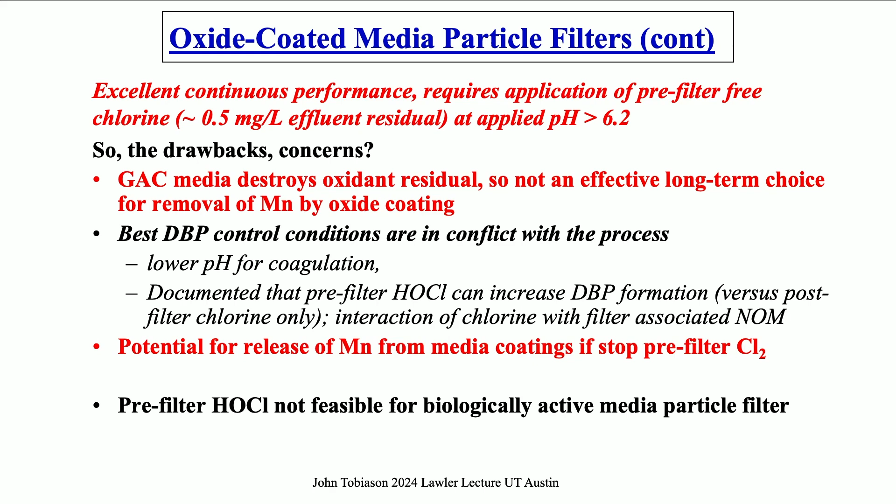So we can release manganese. If you want to have a biologically active filter, you're not going to continually bombard it with free chlorine, right? Not going to happen. So what's the solution? The solution is the third method: let's not ask particle filters to also be dissolved manganese removers. Let's separate those—let the particle filter remove particles, and do the other part somewhere else.

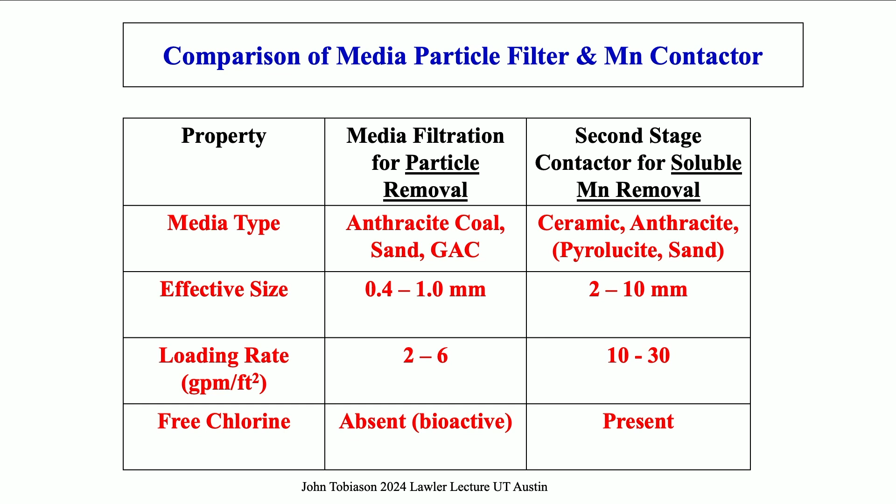So we use a coarse media contactor, a second stage contactor, to remove the manganese. The difference is we can run this one biologically active as a standard media filter, and this one we can put super coarse media in and run it at 10 to 30 GPM per square foot, with 30 seconds of contact time, and we take up the manganese. We don't need this other stuff, so it's great.

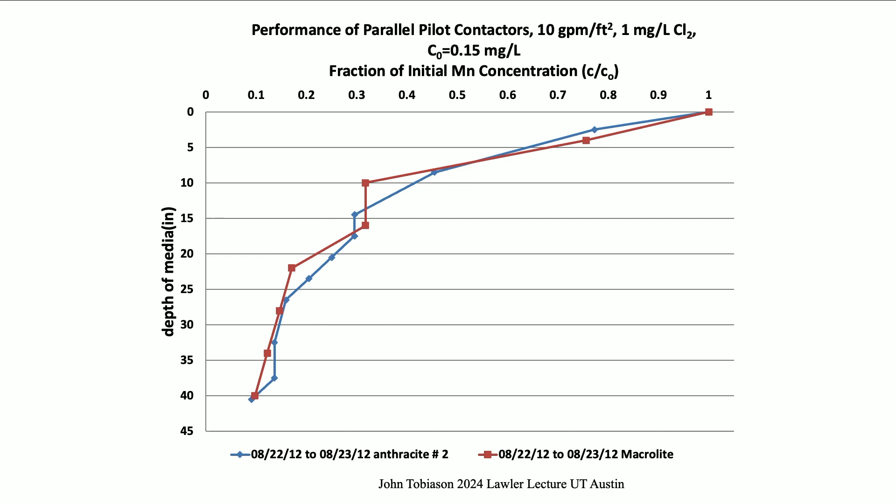This is just a different master's student's work. These show manganese being removed in the depth of a 40-inch column, from 0.15 down to 0.01 or something like that. We did multiple disinfectants, multiple media, all this stuff to get to that result.

This was an idea from Bill Knocke at Virginia Tech. He had a column, shipped it up to us at UMass. We did some studies with it and lab scale research, and we had a utility with a great relationship, and their consultant who boldly said, let's build this full scale from our pilot stuff. So they went from the pilot to full scale, and this plant went online in July of 2013, and now there are new plants going online to do this.

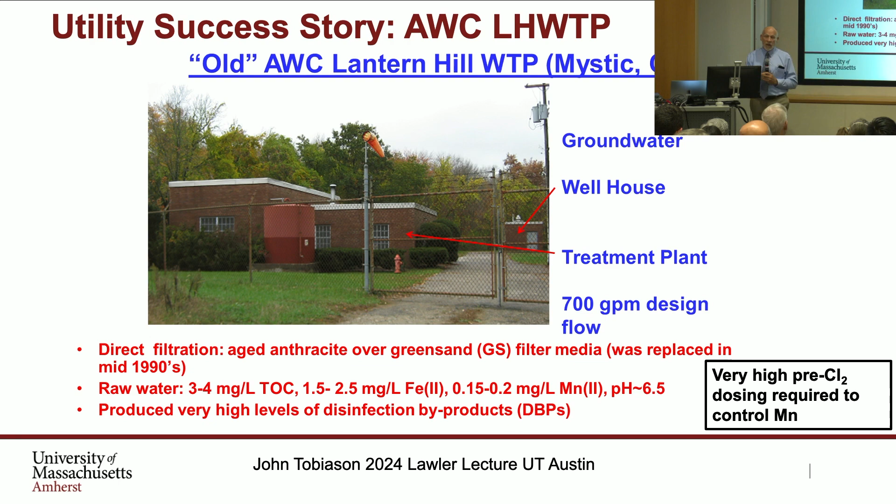If you don't actively work to stop manganese reducers, they win. They seem to be ubiquitous—lots of organisms can do both, and they always win. So as a utility, some of my students and I did pilot scale studies. Aquarion and Tighe & Bond designed a new full-scale facility, and it worked great.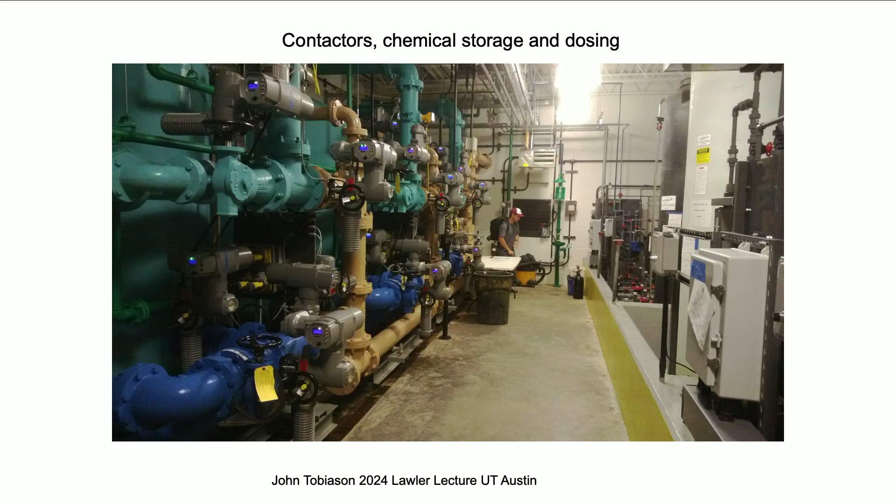So what happens across this plant? These kinds of plants all look the same—this could be PFAS, right? Steel vessels, pipes, valves—they're all the same. But here's what happens.

The iron gets oxidized with pre-chlorine in this case to particles, and it's done—iron story over, front stage, all set. Turns out they've switched to pre-permanganate because operationally, if you overdose the chlorine, you make DBPs. So it's easier not to do that.

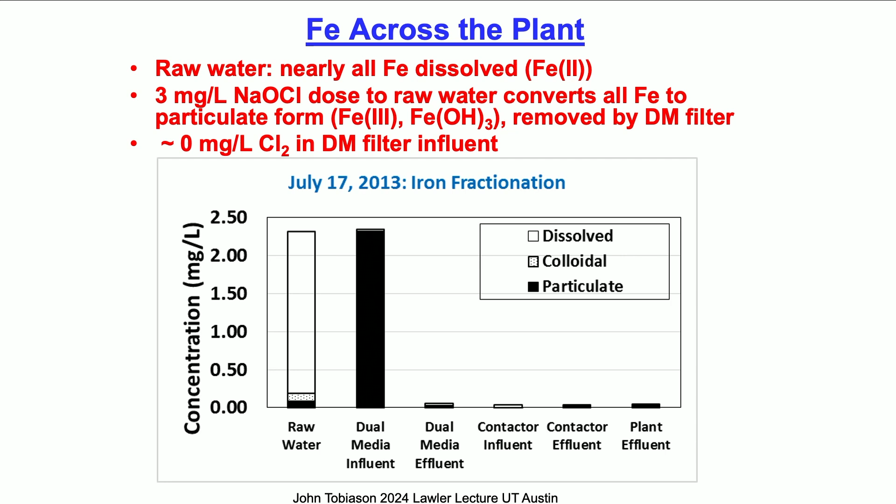Now I'm in real trouble. Oh my God, what did I hit? Presenter mode, quick. It's right there—this is black background. This is too hard. All right, look at that.

The cool thing is the post-contactor does not make DBPs, unlike a dual media filter—it's just oxidizing manganese. We were worried that manganese oxide would catalyze DBP formation, just like it catalyzes a lot of other things.

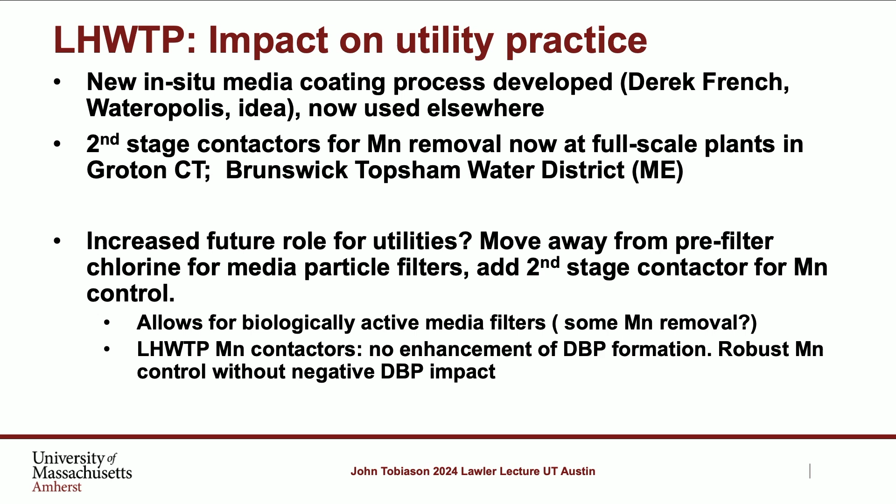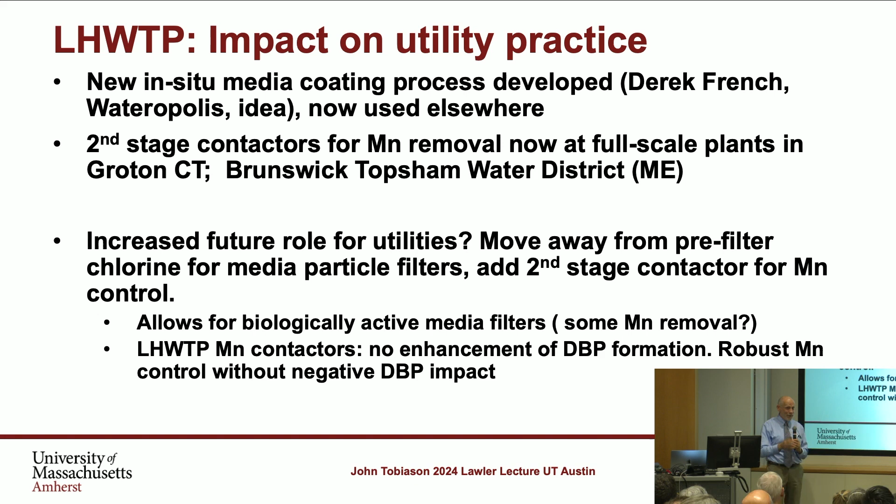Just get some sand and anthracite and do a couple of steps, and you can make the media coated. I think it's an increased role, because if we want to have particle removal filters that are also biologically active, you don't have to remove dissolved manganese, but we do want it to actually biodegrade some stuff. So we'll still have it do two things, but we can do that and just put in second stage contactors.

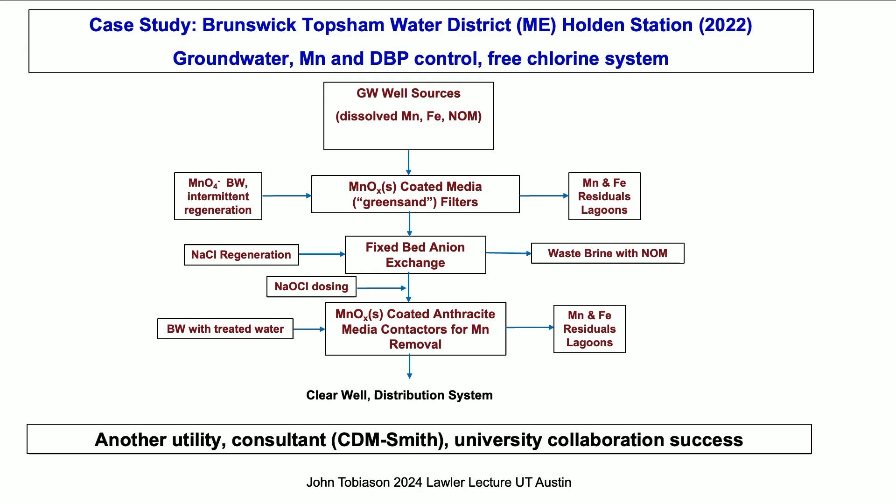And this is another utility consultant collaboration, in this case CDM-Smith, University collaboration. I was just there last week. I hadn't been there since November 22. For some reason, when we drove over the river, it was a mile on the way to Swans Island, Maine. Leslie wasn't interested in going and seeing this treatment plant.

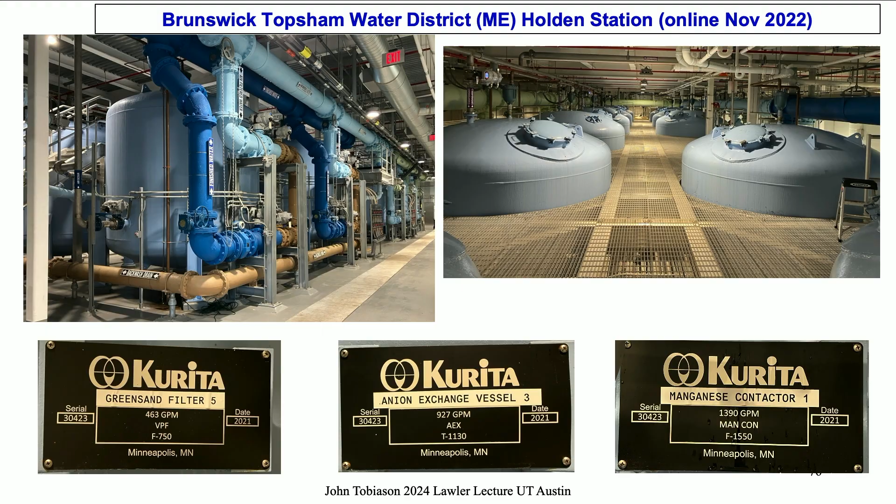Can't imagine why. But there's all the contactors, and it's so cool. They're so smart. Turns out to get to the media, to look at it, you got to open these hatches. And most of my students are used to being up on ladders. There's not enough room to get a sampling in. These guys built this great deck. Look at that. This whole deck, these are all the contactors, and I couldn't resist taking the pictures.

Kurita bought Tonka, I believe that's the case. So we've got greensand filter 5, anion exchange vessel 3, and much to my delight, manganese contactor 1.

Because on that first plant we built, it took a lot of work to get the provider and the consultant to not call that a filter. Worked really hard to call it a manganese contactor. So to see that on a nameplate from a manufacturer is like victory. It really felt good to see that.

Yeah, I mean, it's really interesting. But anyway, that's the process. So a different set, right, of meeting this combined DBP manganese challenge. In this case, it's a removal system here that's intermittent regenerated. But now they don't care if the breakthrough is 0.07 manganese, because this thing's going to take it all. They can run this differently. But they had this very reactive NOM, and I'll show you the result of that.

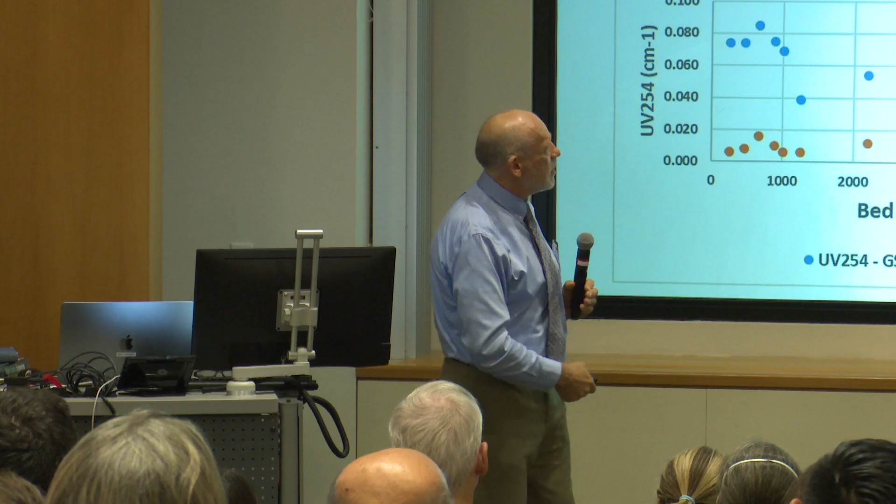This is UV 254. The blue dots are what comes out of that first stage green sand filter. It does not remove NOM, never was intended to, right? And then this is coming out of the anion exchange resin, and the goal for treatment was found out by doing lots of SDS DBP measurements, and this is THMs versus UV.

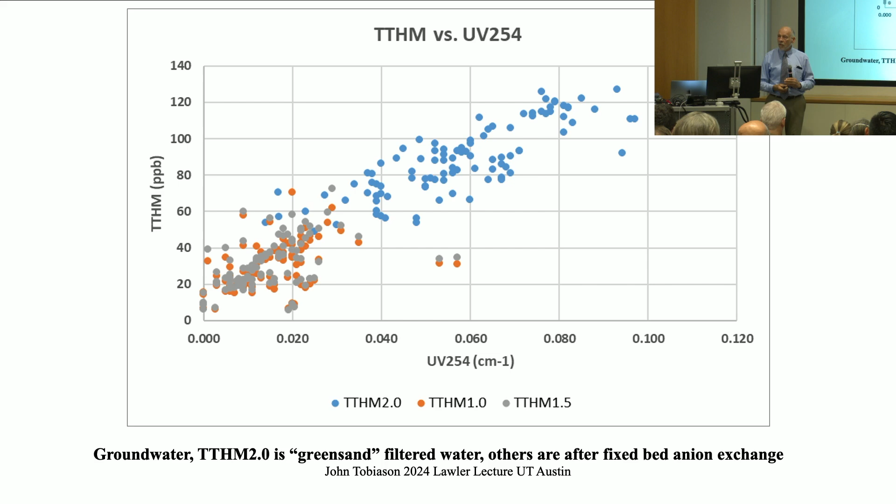This is what came out of the first stage contactor. This is out of anion exchange, and it turned out they wanted to get to 60 or 50, well below. And it turns out that meant their goal for UV was in this 0.02 kind of range, which for that NOM, I was surprised. It turned out to be nasty. It had a high specific DBP yield. In other words, for every milligram of carbon, it made a lot of THMs, more than it should have, in my opinion, but it was the groundwater. So that's the story.

The disinfection, DBP, and manganese control strategies may conflict with each other, and that's no surprise. Throw in PFAS, throw in something else. Integrated treatment plant design requires that.

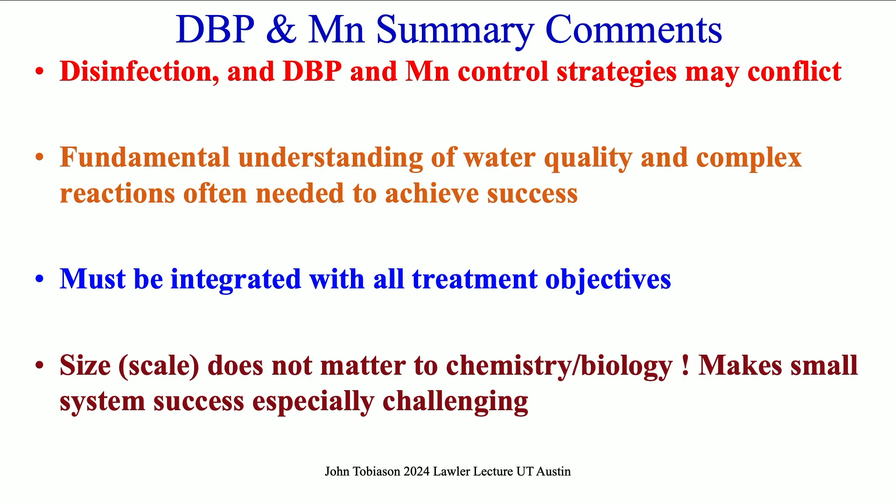We started with that subject. Des mentioned our paper on particles, integral design. I think fundamental understanding is needed to achieve success. There's these myths that are perpetuated and mistakes that are made because of not just basic understanding, and it's got to be integrated.

And the other interesting thing, and one of the challenges, I've done a lot of work recently related to small systems. I have a lot of responsibility to assist the state of Massachusetts with support of small water systems, and also point of use, point of entry. And fundamental chemistry and biology does not care about scale. It's the same complexity whether you're giant or small.

Complex chemistry and having the knowledge and appropriate approach to deal with that at the small scale is challenging to achieve, due to the situation we have with the fact that we produce a product that we don't pay enough for, and thus we can't pay enough labor or get enough money in to provide this water, which is essential to our life. I talked to the students about this today.

It's perplexing to me that we have a lot of things I'm willing to pay a ridiculous amount for, right? Water, I should be willing to pay 10 times as much as I pay for this for water. I can't live without water. I can throw this away and be fine. So why is that? It's a weird societal problem.

So anyway, one of those big pictures in our business.

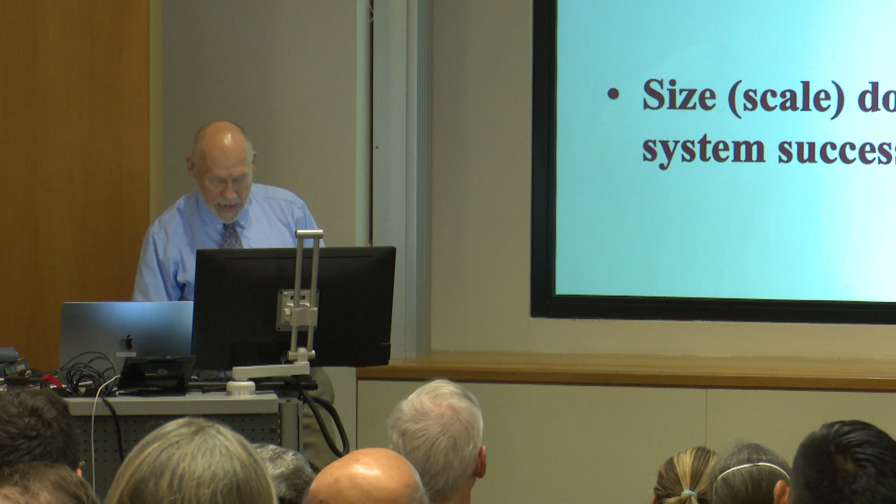I also want to end by saying thank you to everybody for being here. In particular, I want to thank Leslie for being with me. Hopefully now I have some time, well, I'll have more time. I formally retired, by the way, 10 days ago, and I'm a research professor. More importantly, on July 1st, I stopped being the department head. Jerry appreciates that. And those are our grandchildren, Soren and Greta, in Boise, Idaho, where we get a chance to visit them. Thank you, Leslie, for your support throughout all this stuff.

I don't know if we have any moments for questions or answers. What happened to them? I'm going the wrong direction. There it is. All right, no promise on the answer.

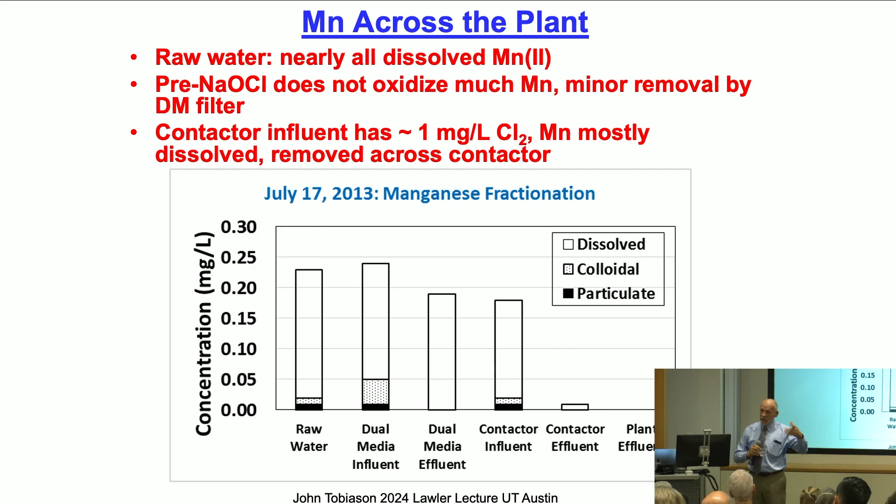Yeah, there's some weird stuff that happens with permanganate, I got to say that. I want to get back to this plant. Sometimes it appears that permanganate, or manganese, comes through dissolved greater than in the raw water, but really measures as dissolved, and I don't know that if it's really Mn7 permanganate, because the water's not pink. So there's some interesting stuff there, but all with the colloids and things. Fortunately, the second stage takes care of it. No, the contactor is quite robust. I will say the colloids on the surface of the media in the contactor are fragile.

That plant, when it ran for the first 2 years, we did every backwash, brought a sample back to the lab, and measured how much manganese came off—it was pretty much 100% removal. We knew what we took out in the contactor, and all of it backwashed off. Plus, we measure the concentration of manganese on the media. We've done it now every few years for the utility. It's really painful, one of those hard-to-get-to things. If you ever go out and ask someone, can I get a sample of your media? It's not a simple question to anybody who runs a water treatment plant. That's a hard place to go.

But it didn't accumulate. So there was a question you had raised in the middle. Wait a second, can you get her? Could be. I'm scared, I'm not used to using a microphone.

My question was, what causes the buildup of different—you were talking about the manganese and iron. You said that sometimes there's a buildup of those metals in fire hydrants, and I was wondering what causes that.